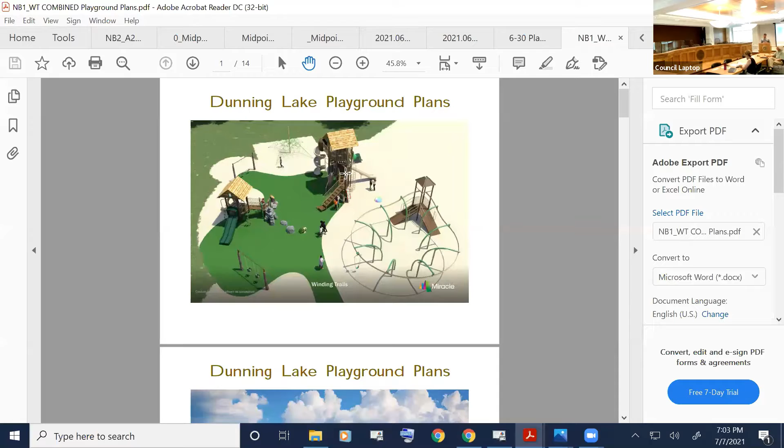What was presented to you a few weeks back is our plans to replace the Dunning Lake Playscape. It was built in 1990 and is showing its age. It is still useful, but we do have some issues with the ground cover and meeting current safety standards. About a year ago in October, we went to the national conference in Baltimore, viewed a number of vendors, narrowed it down to 4, had 4 presentations, and decided to go with a company called Miracle, with the installer, a local company out of West Hartford called Creative Recreation.

It's basically got 2 playscapes, which we have there now, a 2 to 5-year-old playscape on the left, the smaller one, and the larger 6 to 12. And then it's got a gravity track rail, that neat looking thing on the right, along with a couple of swings. And you'll see the artificial synthetic turf there. That is what is required for the higher elements. We had long discussions around the proper material. Because we have Dunning Lake Beach, the sand migrating into some of the other surfaces we considered negated their effectiveness in fall zones.

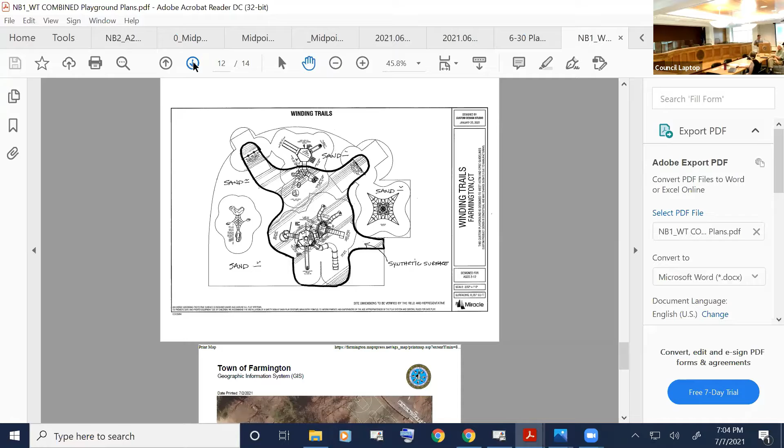So this actually worked out. I think you've got a cut sheet of it. It's actually a sand infill, and there will be some maintenance we'll do weekly in terms of mixing that stuff up. That's a picture Shannon brought up there of it. Brian's got some more specifics in terms of location and proximity to the water, and I'll let him discuss those things. Thank you, Scott.

Commissioners, my name's Brian Cunningham, professional engineer, state of Connecticut. As Scott mentioned, I'm chairman of the Area Facilities Committee as well as vice president of the board of directors. You read my mind. I've got this one and I've got an aerial. I'd like to speak from that one for now. Yes, certainly. Thank you. I hope my binder doesn't do anything to your keyboard. There.

At the bottom is a 20 scale 8.5 by 11 plan that I put together showing the layout configuration of the elements. The nearest element to the edge of the lake is 100 feet, measured perpendicular. We do have a small expansion, about 1,350 square feet to the northeast, the back side of the elements. What was driving that was the fall zone for the swing sets, one for the older kids on the southerly side, and the small babies and toddlers with their little baskets, which also has a fall zone that extends outward. So we wanted to cover that with the new surfacing we're proposing. And then to the north is the younger kid elements.

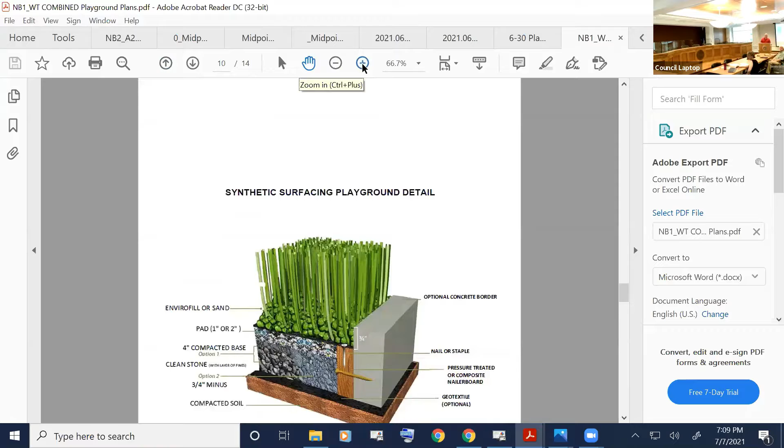So there's a pre-step to putting in the compact base, and that's an edge board, and it includes a nailer that's used later on to hold the geo, what do they call that? I wrote it down somewhere, but the grass looking material that gets nailed down to this nailer, and then there'll be a sand infill in that grass material. Between the grass layer and the compacted stone, there's a 1 to 2 inch layer of recycled material. It's an impact surface that's sealed off from the environment.

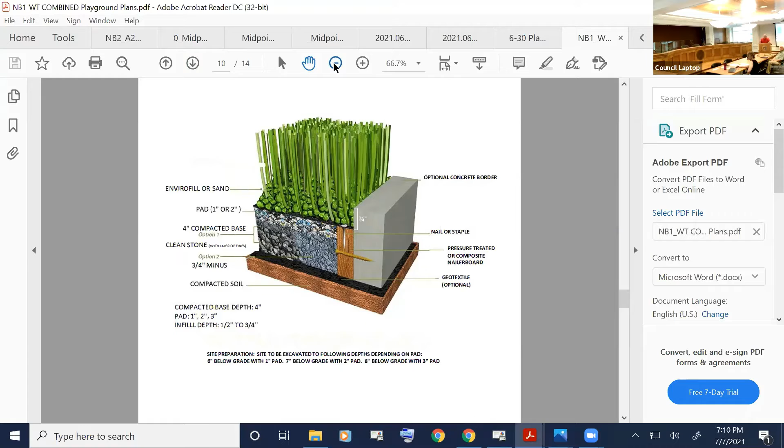The Playscape installer will fine grade that surface. They'll set foundations for the new elements and install all the components to the system. Plan to start upon getting approvals. We'd like to start after our acoustic festival in October. Get most of the site work done before winter, and that way we'd be able to get up and going anytime over the winter into the spring.

I think that's it, unless anybody has some questions. Either Scott or myself can address any questions that anybody has. Okay, perfect. Thank you. All right, start with Rich. I don't have any questions. Looks like a good project. Thank you. Dave?

Yeah, just one quick question. The schematic showed envirofill or sand. The envirofill looked like it was some sort of green globules. You're not going to use that. You're going to use sand. Okay. Just wanted to clarify that. Thank you. Okay, thank you. Robert? No questions, thank you. Mark? No questions for me. Ned?

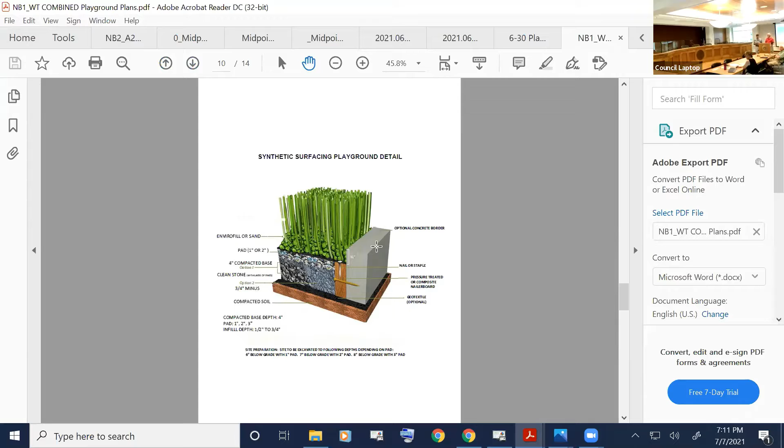Yeah, are they gonna use this optional concrete border? No, that will not be used. That'll be just bordered by the sand. Okay. And I'm just trying to figure out, so when I look at some of your digitally made photos of this thing, you got like a green area and a white area. Yeah, like that picture. There's a couple of them.

So is the white area just gonna be regular sand, and then this green area is the astro cushioned whatever? Yeah, exactly. So the green is the synthetic surfacing, and everything you see here white would be our regular beach sand, which is actually brown looking, but it would be regular beach sand that we get each year.

Yeah, and then Mike, sorry. Sorry, Scott, sorry about that. Yes, the green is a synthetic turf, and all the white in that graphic is actually our beach sand. So it would be browner in color, but it would be the sand that we've got there now. Okay.

I think that's all I had. Yeah, it looks like a good project. Yeah, that's it, Ned? Yeah, that's it. Okay, thanks. Just a quick question. It sounds like you're talking about starting to do some of the groundwork in October. Is that to allow people to still continue to use what's there over the summer, then gearing up more towards the fall and into maybe late fall to start getting this stuff in so you're ready to go by spring?

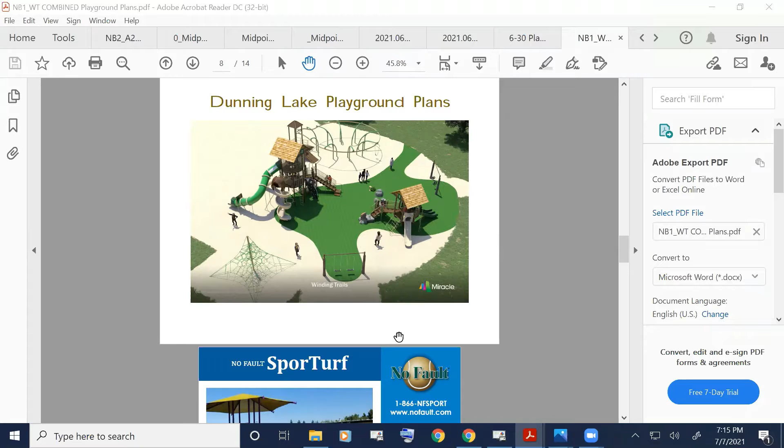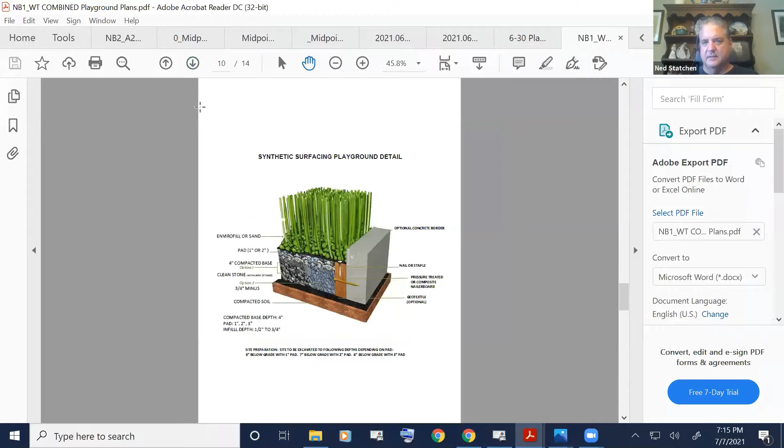Yeah, as long as we're clear that they are using sand as the infill on the AstroTurf and not whatever those green globules are, because I would be concerned if it was EnviroFill. But if we know we're using sand, then I think it's just replacing similar materials, replacing a similar facility with an update. So is that clear? Is that in the record somewhere that they're using sand and not EnviroFill? Yes. Okay, then yeah, I think it's a normal use. Okay.

I have a question when people are talking about a normal use. Robert, I think you said it's a non-significant activity, but it is regulated, so you're leaning towards an application. I'm just trying to make sure I understand. Yes, that's correct, Bob. I think this would require an application. I would view repair work more like a plunge pool from a stormwater system that requires maintenance. This is clearly replacing an existing structure, but there's a fair amount of activity occurring, albeit 100-foot separating distance. I still think it's an application.

Okay, and I agree with what you're saying because that's my take on it too. But I want to get a clarification from other folks because I'm not sure of the terminology folks were using. So, Rich, clarify where you're coming from on this. Yeah, I would agree with Robert. Okay, and David? I would too. Okay, Mark? I'll come back to Mark. We'll try Ned. Yeah, I would agree that we should have an application for this. Okay. Then Mark?

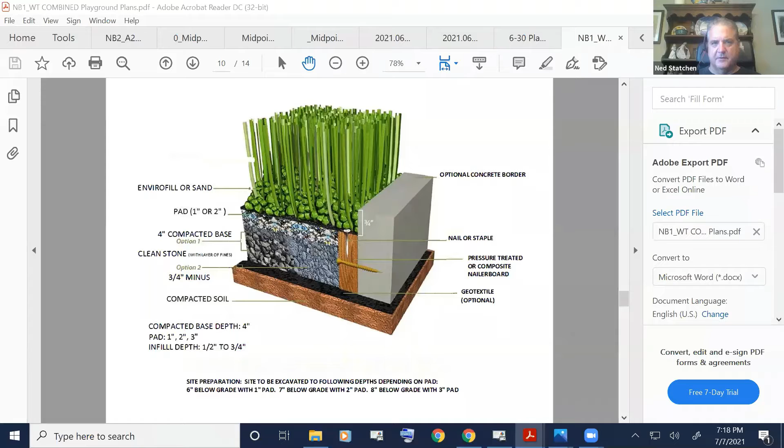So it sounds like we're leaning towards accepting the application. Excuse me, Mark wrote in chat: I agree application is necessary. Oh, okay. Thanks, Ned. I just saw it. Okay. So can I get a motion to accept the application? Dave will do that. Is there a second? I'll second it, Ned. Okay, I think everybody was pretty uniform on this. Those in favor signify by saying aye. Aye. Aye. Opposed, abstaining. But I also agree that it's a good project. So that'll take care of this for the evening.

Thank you. Do you want a site walk or do you want to determine significance at this point? No, I think Robert had said initially that this was not a significant activity, but it was regulated. Okay. Do we want to vote on that tonight or wait? Yeah, I'm happy to do that. Does somebody want to make a motion that this is not a significant activity? So moved by Robert. Is there a second? I'll second, Ned. Okay. Those in favor, please signify by saying aye. Aye. Aye. Opposed? Abstaining?

Okay. Alrighty, okay. Thank you very much. So we'll finish up in 2 weeks then. Okay. All right. Sure. Thank you very much.

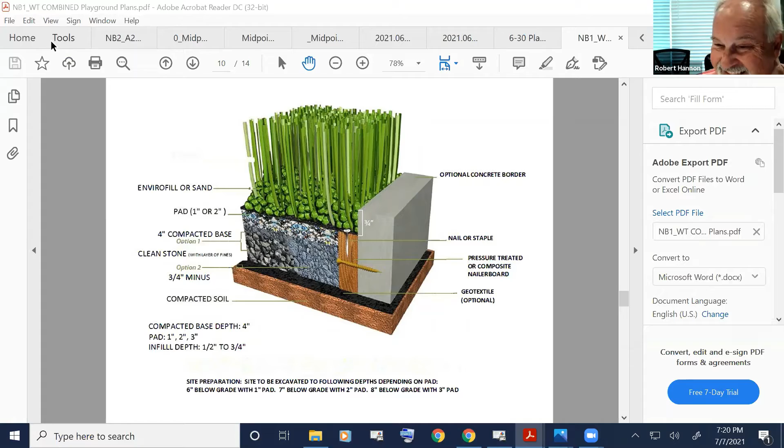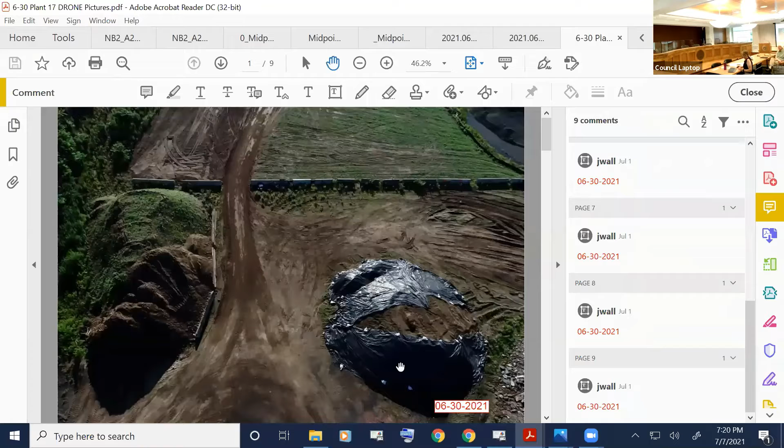And seeing as how I don't have a copy of the current agenda or the new one, what's next? So what's next? We are going to chat with Brian and Crystal Horan regarding 6 Carrington Lane and an expansion to their home. I'll bring that up here. So, and I believe we have Brian and Crystal on the phone.

Is that correct? Yes, that's correct. Good evening, everybody. Good evening. Good evening. Thank you for taking the time, and Shannon, thank you for helping expedite the process. It's been a hectic week for us, but we're excited to present, and I'm actually excited to be home. It's been about 19 years since I graduated, grew up in Farmington, and my wife, myself, and our 2-year-old daughter are back home, and we're really excited.

So what we have proposed today is, we're hoping to get approval to do roughly an 8x12 bump out addition on the southern side of our home. And as you can see on the map here, the rear setback is right in that 20-foot range. However, there is an existing deck that puts us probably somewhere in the 12.5 to 13-foot range of that boundary, inclusive of the wetlands that surround our property.

And what we're asking for is that the addition would basically be a 2-level addition. It would go out only as far as the current existing deck. And I think with regards to being aware of the environment and any of the steps that we would need to take, I know there's a couple of different ways to go about the actual construction. We currently do not have a basement at this property, so it would be either extending the crawl space and building out on a foundation, or entertaining the idea of building on top of the existing pillars that are there right now for the deck.

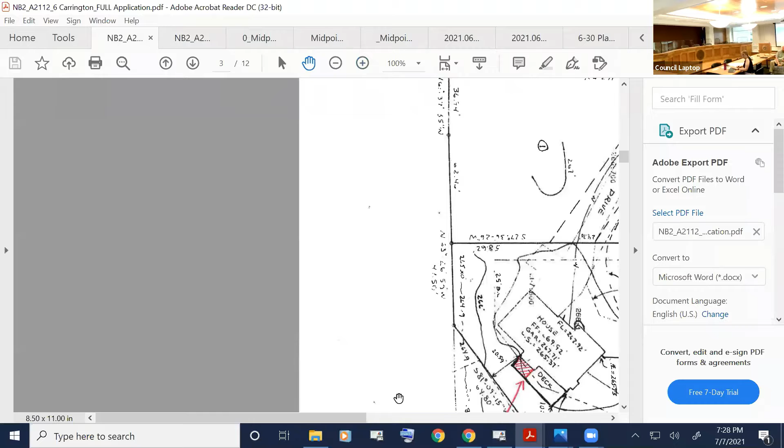So this is the setback line here that they need to follow. This is a side yard setback, and then this is the rear setback here. I'm going to flip back to the other map, but I thought this would be helpful because it shows the wetland, property line, and setback line fairly clearly. Yes, it's very helpful. When we come back here, those lines are still there. It's just, there's a lot more detail on it.

So here's the property line, the dark heavy line. This is the wetland area. You can see the arrows, and it's changed. It's a dashed dot line, so it's the two dash and a line. And you can see it here sneak out to the outside of the property line, as we had seen on the subdivision plan. And then this is the 20-foot side setback line here, and then the 25-foot rear setback. Is that helpful? It is.

It helps a lot. So again, I think the conclusion I'll reach is it's a use as of right for residential property. It's the conversion of lawn to a structure, and the separating distance between the structure and the wetland is not going to be any less than before this. So I'm comfortable with what's being proposed. Thanks.

Okay, thanks, Robert. Mark? Mark chats that he has no questions. Okay. Ned?

So you are going over the building line though. And so are they gonna have to go to planning and zoning for that, or a ZBA? So this was precipitated by an application that Horan's made to the Zoning Board of Appeals, and as luck would have it, I'm agent to ZBA as well. So when I was reviewing the legal notice, I realized that this was also going to need, at a minimum, a discussion with our Inland Wetland Commission to determine if it's permitted as of right.

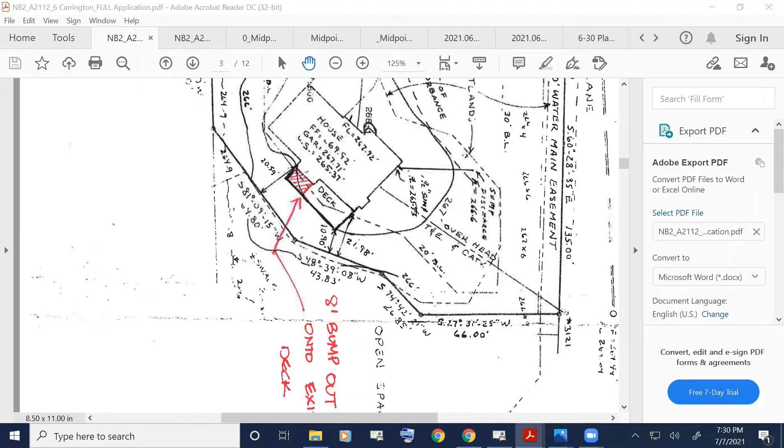Okay. All right. Well, it's not a big encroachment. They're still within what they have built as a deck right now, basically. On one of the sketches, it looked like they were gonna build a patio at grade level on the other side. You have a deck on this side and the other side. Yes, there is an existing patio. Okay, so that's existing? Yeah, correct, it's there. Okay. All right.

Do you see any wetland markers on the property? I'd have to walk the property again. I know that the land trust markers are very visible. Yeah. Okay, I'd have to go back and take a more in-depth look. I've never seen any wetland sign, but they might be there. There's a lot of vegetation back there. There are little signs on posts and they are easy to miss sometimes.

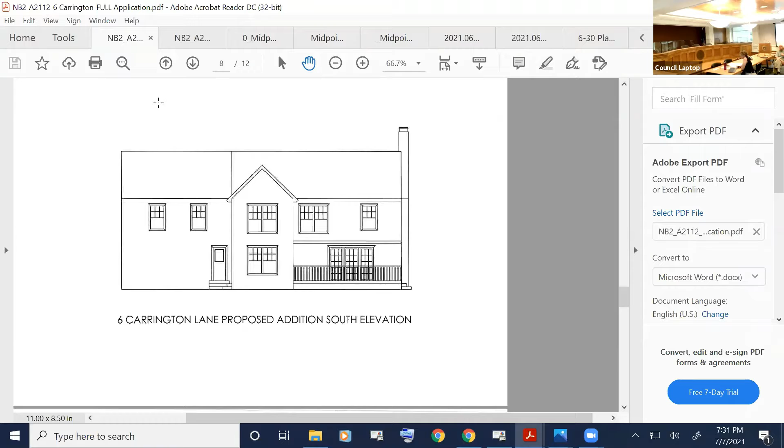I'm just wondering. I don't believe there's a conservation easement on this. Oh, there isn't? No, because the land outside their property is the land trust, and that's normally where we'd put the conservation easement. So if the land trust markers are there, that's really providing the benefit that the conservation easement markers would. All right, okay.

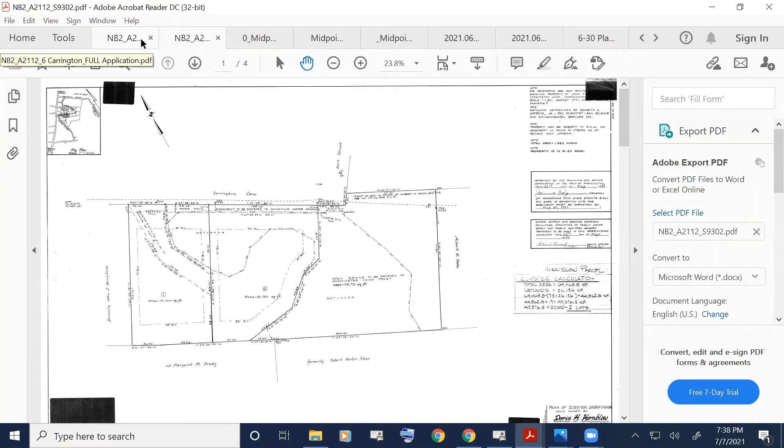Okay, so Shannon, we need to make a decision as to whether or not this is a use that's allowed under the regulations for residential use. Correct. Would somebody care to make a motion to that effect? This is Robert. I move that the project be approved as a use as of right for residential property. And Shannon, do you have the regulatory citation? Yes, section 4.A.4. Thank you. Is there a second? Dave will second. Okay, it sounded like everybody was pretty much on board, so I'll go right to vote. Those in favor, please signify by saying aye. Aye. Aye. Opposed? Abstaining?

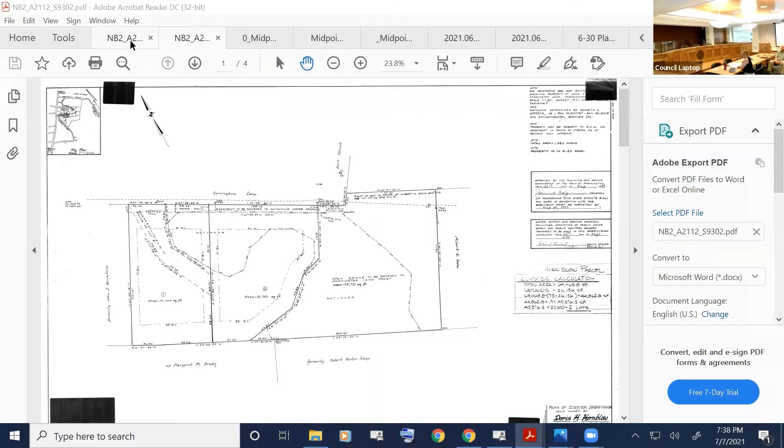Good luck at ZBA. Thank you very much for your consideration. Appreciate it. Thank you both for calling in this evening. Thank you, Shannon.

Mr. Chairman, this is Robert. Just make sure that if you go through ZBA and it's approved, your contractor works closely with the town staff, because you are in very close proximity to the wetlands. You want to make sure that your soil and erosion control is put up first and that they don't move any equipment into the wetlands, because that would be problematic. But if you work with Shannon, everything will go fine. Noted. Thank you. Will do. Thanks, Mr. Chairman. You're quite welcome. Good comment.

I'll defer to you, Shannon. Sorry, Bob. All right, we're going to go to JRF Management LLC and Coyote Real Estate Development LLC. I believe we have a number of people on the phone, so whoever wants to take the lead, please introduce yourself and we can get started. Good evening to members of the commission. My name is Robin Pearson. I am an attorney with the law firm of Alter and Pearson in Glastonbury, Connecticut. I am here this evening on behalf of the applicant, JRF Management LLC, which is the owner of the application site, and also Coyote Real Estate Development LLC, which has a portion of the site under contract for residential development.

There are several properties that comprise this development site of 24.85 acres, which is located between Farmington Avenue to the north of the site and the Farmington River to the south. It comprises four parcels: 1349 and 1371 Farmington Avenue, and lots 8218 and 8237. They are all part of the Midpoint mixed-use development proposal, which is a combination of new residential development and redevelopment and repurposing of the McCullen commercial side of the site, all to create this mixed-use concept, which is fairly unique under the new zoning that's in place.

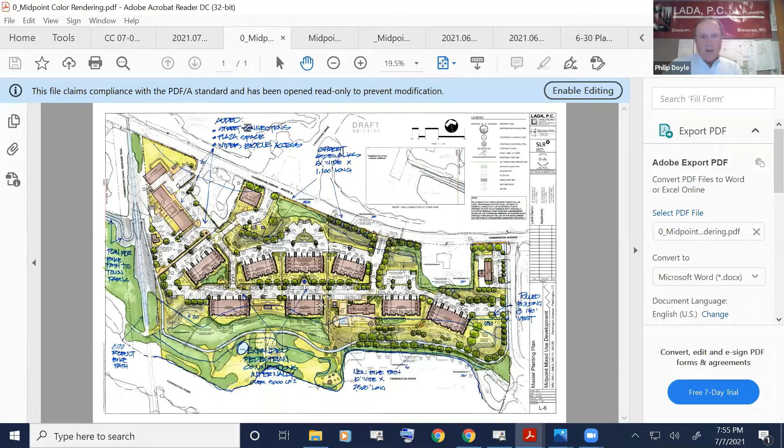And I think we have a reasonable plan, and perhaps Shannon, let's go to that color rendered plan. And you can see what's happened. We dragged building number 8 in about 140 feet on the eastern boundary, pulled that more into the core of the site. And down that main street, we've pulled the sewer line away from the river, and we'll be running the sewer line down the main street, actually shortening its length to some degree.

And we have the same amount of buildings, a pool and community center complex. So Shannon, if you could step this back a little bit so that we can see more of the entire site, that would be helpful. Just to give us a sense of where we are, there are the identified wetlands that Megan Raymond picked up. Those have been picked up by the surveyor, and they are shown in a blue line that runs right through there. You're right on top of it.

Right through there, it runs around a peninsula that was left in the excavation efforts on the property, and then runs along basically the base of an embankment. There is a 150-foot upland review area that's also in blue. It's that line there, Shannon is tracing it, and we have parts of 3 buildings. They've been identified in the data table. A section of building number 8, a small corner of building number 5, building number 6, and a corner of building number 5 in the upland review area. And we have a part of the pool and some sidewalks.

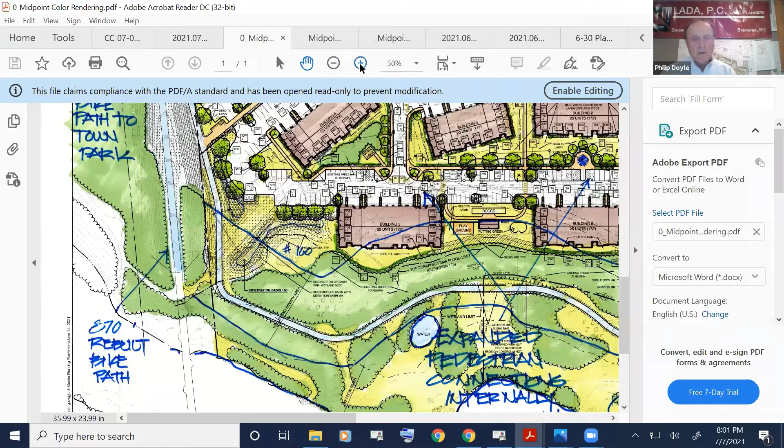Shannon, if you could point out the 175 elevation. The 175 is the FEMA flood line that runs through the property, and it's that black line right there that is between the identified poorly drained soils and the upland review area, right through there. That's important because we want to make sure that we have no disturbance within the floodplain, and that's the FEMA line. But we know that the town of Farmington in the zoning regulations has a flood zone, and even though the flood elevation line by FEMA is 175, all of the buildings have been set at 182, which would place them above the town of Farmington specific zoning regulation flood line.

So the pad itself, think about grading, the property is generally level, 20 acres or so, and in the area where the buildings are being developed, perhaps the lowest elevation is about 176 and the highest is about 182. So over 25 acres, we've got about 6 feet of topo, which is almost flat. And the buildings are situated all at 182. The water drains into either catch basins or is directed into lawn areas where it would receive treatment by running through lawns and then into infiltration basins.

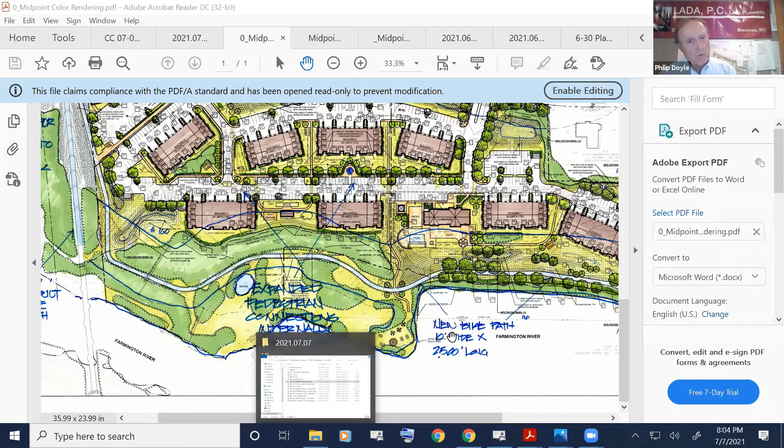Shannon, could you flip to those last couple of pages that are the invasive species plans? Yes, I will. I wanted to touch on that for a second, because the site has a history of being disturbed for soils excavation. Yeah, they're the colored ones at the back. Yep, it's easier to. Oh, there's the dock. You want to go back to that?

Here we go. Yeah, that's the type of dock that we'd be proposing. It would be anchored by 4 removable posts that would come out in the fall, go in the spring, and they float. But that would allow us to have access for the residents to the river without disturbing the river bank. We could direct all of the traffic onto the dock and not have to worry about people dragging their kayak down to the beach. And we think this would be a much more sanitary way of handling that situation.

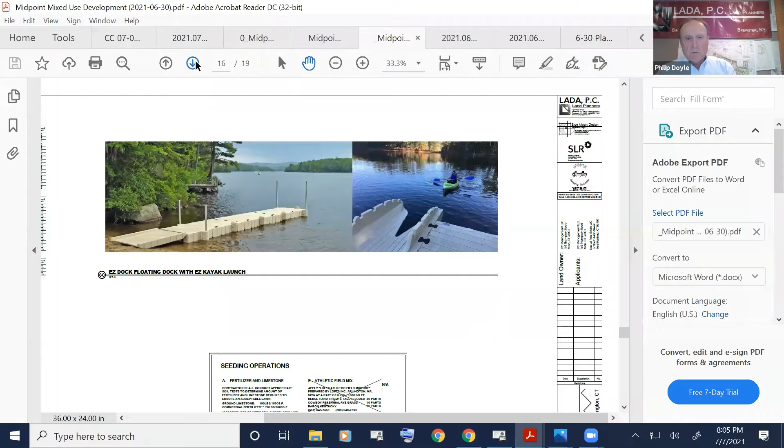Shannon, can we just go to those last couple of the invasive species plan? Yes, and maybe if you backed that off a little bit so we could see more. I at one point had given the town staff, and perhaps the members of the Wetland Commission had seen it, 4 pages or so of photographs taken all around the property of the extent of invasive species coverage, and it's really remarkable. The various colors on this plan are representative of where different invasive species exist.

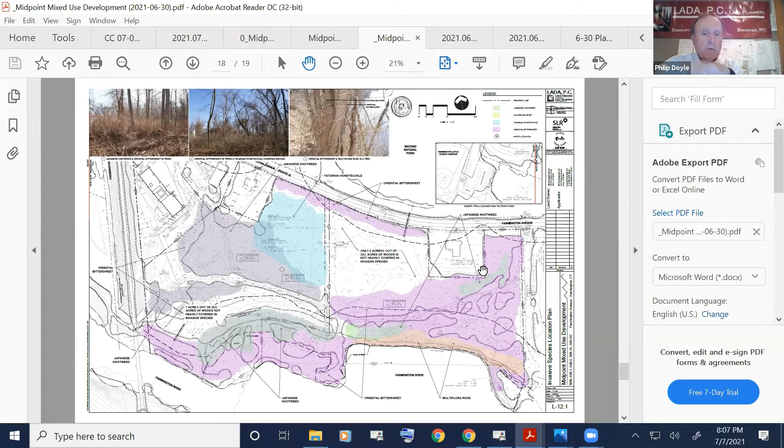And I know when Megan has been out on the property, she's found even more invasive species by type than I had identified. But we have large areas of Japanese knotweed, large areas of Oriental bittersweet. We've got multiflora rose. We have all types of invasives that have wanted to colonize the disturbed areas of the site. And let's flip to the next slide there, Shannon.

When we get through with this development, what is going to have happened is that the invasives in many of these areas will be removed by some of the site construction. Along the river's edge, however, we have Oriental bittersweet that has colonized much of the existing tree mass along the entire river's edge. We're going to have to cut that out.

And then we have the large areas, particularly on the west, of the Japanese knotweed, right in this area. The areas that are blue in that area are Japanese knotweed, and that's going to require some relatively continual maintenance. We've seen people be successful with the Japanese knotweed with cutting over a period of time, but perhaps even the use of some chemical retardants to kill the knotweed. It is very, very difficult.

At this point, I am not proposing the disturbance of the embankment in the area immediately on the screen here, that is sort of the eastern half of the site that runs from the bike trail down to the river. That area is colonized in part by briars, some of the wild rose, and perhaps even some of the bittersweet. Now, the bittersweet is killing the trees in this area, so we've got to cut that out.

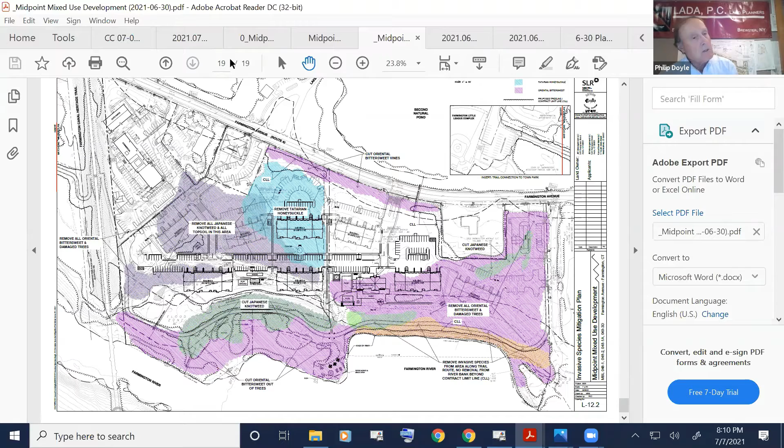Shannon, could we step back and go to the L, perhaps 4 and 4.1? Way back. That existing condition plan might be helpful, the one you had there a second ago. It might be the L2. Yes, go to that plan you just had up. Yes, thank you. I don't know if you can see this clearly, but when the plans are printed, they're much easier to read, but there is a light tone. It's supposed to be a tan tone shown on these plans.

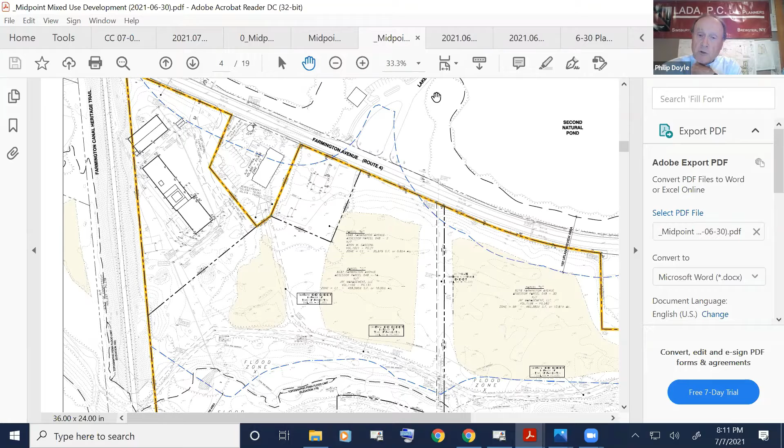And those areas, I had pointed out to you a few minutes ago, the line of the poorly drained soils that Megan had identified along the river. But when we talk about alluvial soils, it is these tan areas that sit in between the sewer lines on the property that are the alluvial soils that Megan has identified. The white areas in between are not. But these areas are, and when you total those up, there's about 5.2 acres of alluvial soils on the property. We have about 2.15 or so acres of poorly drained soils that are down by the river.

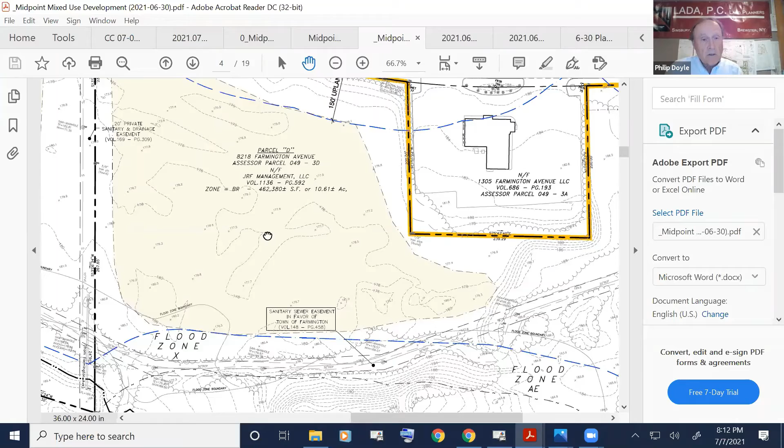Now, Shannon, if we could go to the, I think it's the L4.1. One of the next 2 or 3 slides, smaller scale master plan sheet. It might be the next one. Try the next one. Yes. As we were in discussions with the town staff during a review, it was requested that we consider showing the bicycle path connection into the town park.

We have been aware, I'm sure everyone is aware, there is a municipal park immediately to the west of the railroad embankment that extends another 2,000 feet or so up the Farmington River towards the west. And the plan of conservation and development shows a bike path connection going east onto the property that we're proposing to develop, and also west into the town park. And we agreed that we would show the design for the bike path connection into the existing parking lot area for the town park.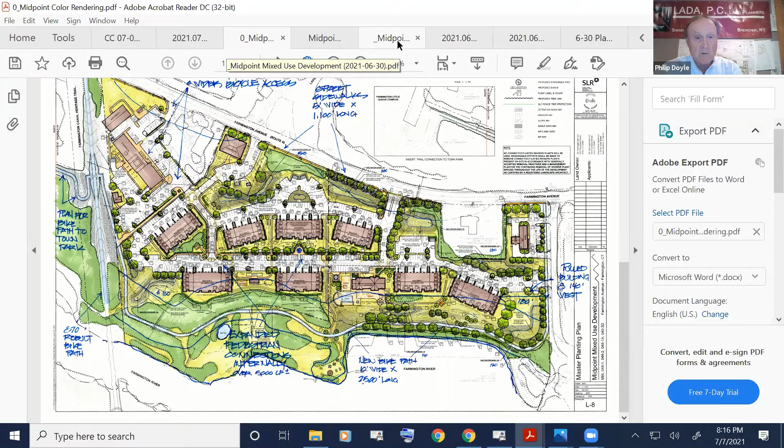And I think with that, I'd like to step back and let Tom get into the detail of how he's handling the erosion and sediment control and the storm drainage. And then we'd like to go to Megan to get into the details of the soils and the impact analysis. Thank you, Phil. For the record, this is Tom Daly with SLR. Shannon, could I trouble you to put up the, I believe it's an L2 sheet, which is the existing conditions? Great. So good evening, Commission.

So we have taken a very close look at this site, and I think if the Commission takes a site visit, you'll see that, as Phil indicated, it's relatively flat. There's not a lot of undulation on the site. There is some steep topography adjacent to the river, but in the area where we're developing, it's very flat. And if you make a site visit, you'll kind of scratch your head and say, well, where does the water from this site actually discharge? And it's our belief and our investigation that actually water doesn't discharge from this site due to the excellent underlying soils and the underlying topography. It's our professional opinion that virtually all the water does just simply infiltrate into the site, except for maybe under some extreme conditions.

Today, as Phil indicated, in the far upper left corner of this map, there's a developed portion of the site, the McAllen building. The McAllen building has a single point discharge that is a 24-inch pipe. That discharge is about 130 feet. There it is. Yeah, thank you, Shannon. There's a single discharge point that goes to kind of a level spreader slash riprap basin. The ultimate discharge of that point is about 130 feet from the Farmington River and about 125 feet from the wetland edge. So still naturally providing a pretty nice infiltration buffer from that pipe over.

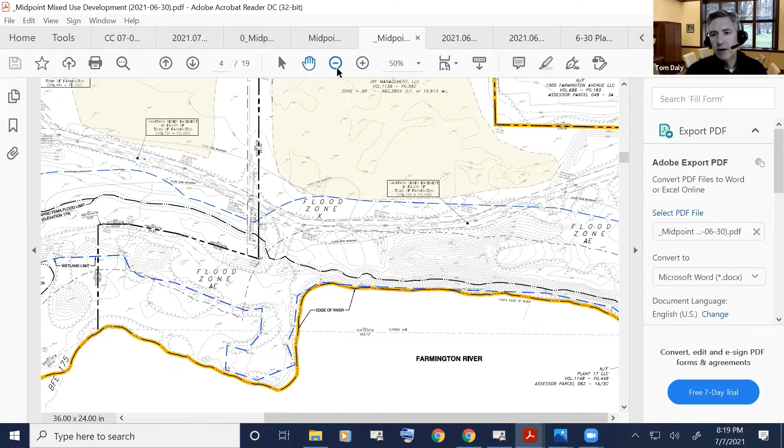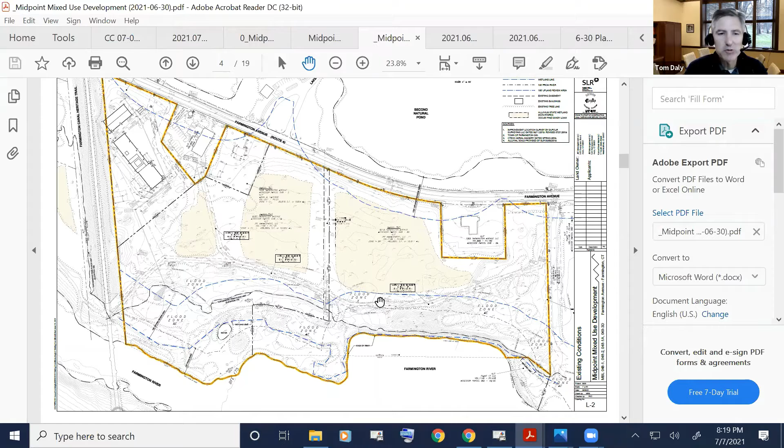As part of our investigation, we did 32 test pits across the site and found no groundwater, found no ledge, and found that basically the entire site was good sand and gravel. So once again, it really points to the fact that we really have a site that's very productive in terms of infiltration. As Phil indicated, the one major utility going through the site is a 30-inch diameter sewer main. It goes from the left where the trail is and goes right through the middle of the site. Yeah, it's interesting. It's not an engineer's dream for alignment, but that's how it got put in, and that is through the site. Otherwise, basically, those are the items on the site. Shannon, if we can go to, I believe it's the UT sheet.

So as Shannon's getting that sheet, obviously we worked very hard to mimic the existing drainage patterns, and that drainage pattern is basically promote infiltration. And as we went through the master plan approvals through zoning, as Phil indicated, this is in the aquifer protection area. Just off plan and to the right is the wellhead for the water company. We received comments from the water company during master plan approval, and we've also done other projects in the area and knew what they were looking for.

And so we worked hard to mimic the existing conditions, where we wanted to promote infiltration to the highest extent possible. And we really did achieve that in two different ways, and these mimic the recommendations from the water company. First of all, we took the buildings to underground chambers. Building water is essentially clean, it's just coming off the roof. And I believe we have 11 of those systems located throughout the site.

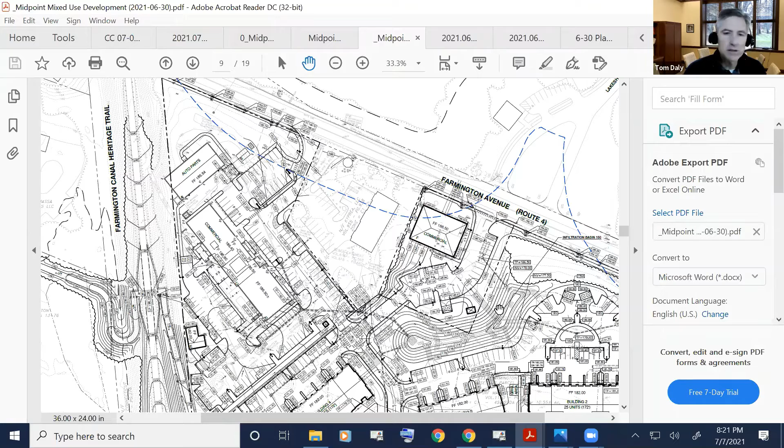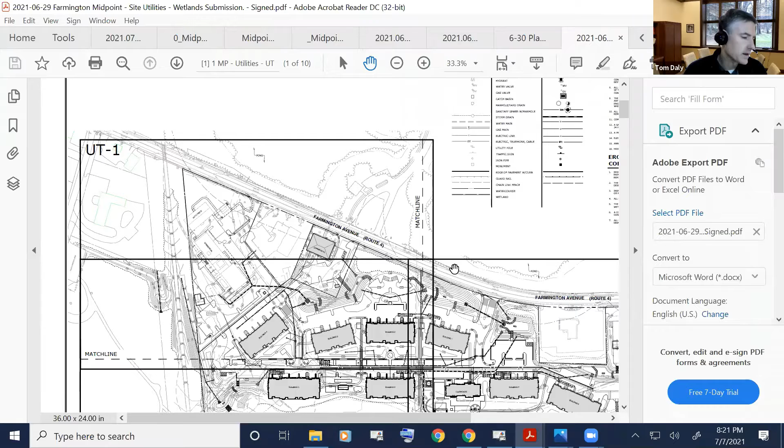The other major drainage system on the site is 6 infiltration basins, scattered throughout the site. They include sediment forebays prior to the discharge, and prior to each sediment basin we have a hydrodynamic separator to provide additional water quality before it gets to the basin. In addition to the sediment forebays, these basins also have infiltration trenches to further promote infiltration. We were able to use those on a project just a couple parcels over, and they worked very well.

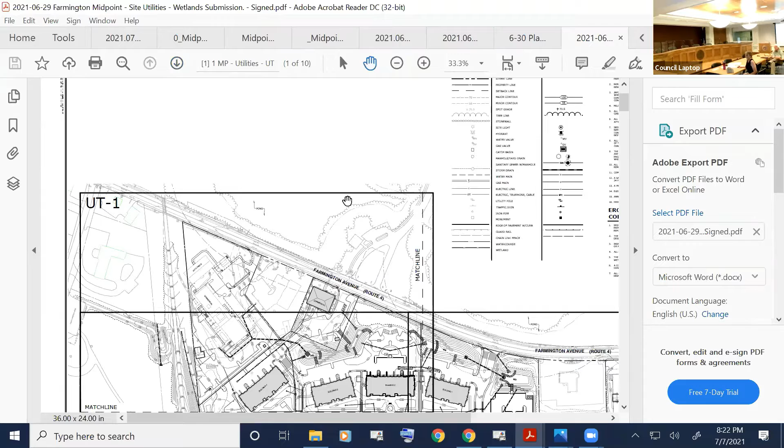So thank you, Shannon, as you're bringing that up. I forgot they were a separate file. Oh, sorry about that. So maybe the previous sheet, Shannon, it's the overall utility plan. Certainly. There you go.

So once again, we're using this combination. Many of the pavement areas are actually just sheet flowing. They have a leak off that goes into a gravel trench and down into the basin. So we're using low impact development. There are areas that we will have to pipe, but in many areas we're just sheet flowing off into these basins. I think we've really covered the site equally. They're not concentrated in one area, they're spread out throughout.

And we also did calculations showing each basin has enough storage even for the 100-year storm. And that's taking credit for only 50% of the infiltration rates as recommended by the DEP. We basically cut them in half to have a factor of safety of 2. We really have 3 drainage structures that are adjacent to the area closer to the river. Shannon, if you zoom in by the McAllen building, down to that discharge in the lower left-hand corner.

There you go. So in the same location where the old McAllen discharge was, we've created an infiltration basin. This basin actually has no formal discharge. It has an emergency overflow, but we are going to abandon the McAllen discharge pipe that we talked about, and we'll be discharging into this basin. This basin will also take drainage associated with the bike trail on the left. And as I said, no point discharge in that location. So Shannon, if you can scroll to the middle of the site.

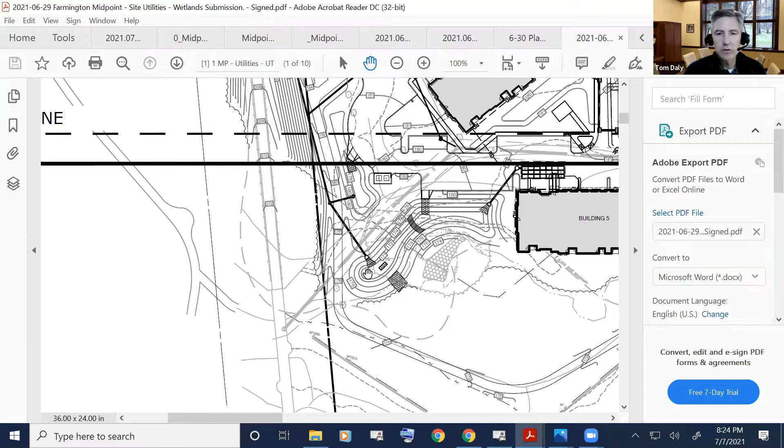So this is really the only pipe discharge we have going towards the river, but we have located it 120 feet, directly adjacent to the 24-inch pipe that's coming from the pond. And this is really just a high level overflow. All the area to the right of this discharge is very steep slope, and we did not want to intercept or mess with that on the right-hand side. So we had to bring a high level overflow around these 2 buildings and have a discharge.

But even there, we've created a biodepression at the end of the discharge. So essentially we don't expect any water to really make it to the river except under extreme conditions. But as I said, we tried to pick the same location where the other 24-inch pipe is and not have a new discharge point.

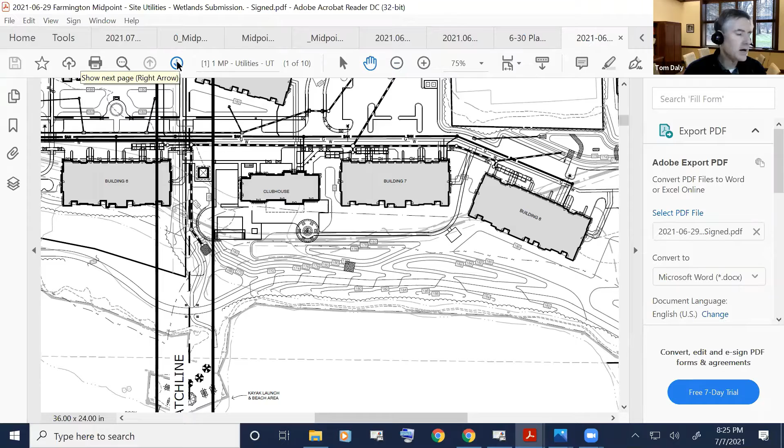So that discharge location is approximately 120 feet from the wetlands and the river's edge. In terms of erosion control, we have put together an erosion control plan as part of this application. The site is, as I said, relatively flat, good sand and gravels, so we should not get a lot of discharge, but we clearly have a wetland resource, the Farmington River, which is very important to protect.

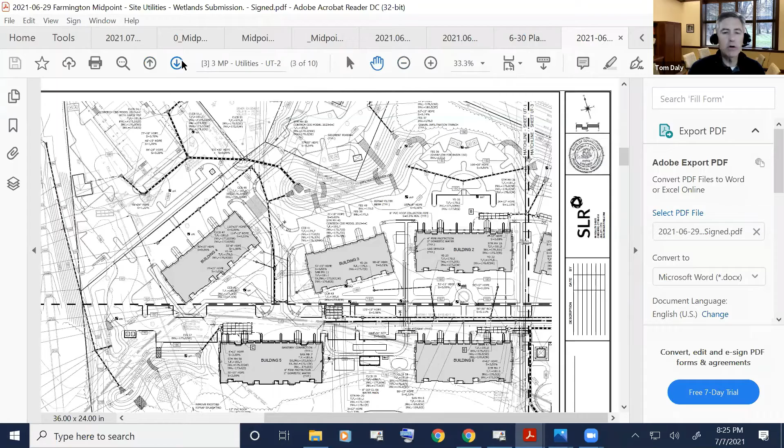And so we have perimeter controls along the trail, but upgradient of that, we have a diversion berm and a sediment trap system that will basically capture all construction runoff before it even gets to the trail. All those diversion berms will send this water into these sediment traps and hold that on site.

I would point out to this commission that we are not using any of the permanent infiltration basins as sediment traps. We were able to locate these sediment traps as an independent thing, because we didn't want to send construction runoff there, which ultimately could have some negative impacts on the infiltration of those as we move forward.

This site has very few steep slopes. The only steep slope that we really had to focus on is, as Phil indicated, we're reconstructing the entire trail system on the left-hand side of the site. We're ramping down steeply from the trail system. So that was one area that had some steep slopes, and we are going to protect that with an erosion control blanket and some check dams throughout there, because that's something we do have to focus on.

With that, that concludes my presentation, and I'd like to turn it over to Megan Raymond to present on the wetlands. Thank you. Great. Thanks a lot, Tom.

My name's Megan Raymond. I'm a professional wetland scientist and registered soil scientist, principal scientist here at SLR and Wetlands and Waterways lead. I'm also a certified floodplain manager. I became involved with the site in January of 2019, and it began by flagging wetlands on the property. As you've heard, we have about 1,800 linear feet of frontage on the Farmington River.

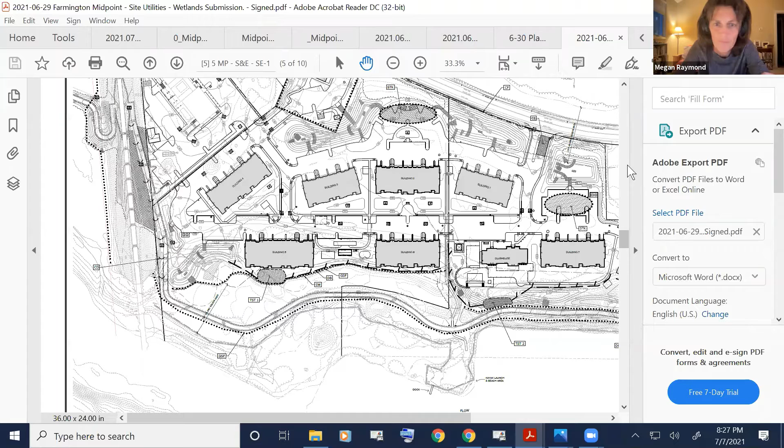Shannon, I'm just trying to figure out what the best figure for me is right now. I don't know. Sure, we could use this. I apologize for burdening you, but I don't suppose you have our existing conditions ecological communities map, perhaps. Either way, the EX plan is fine. The one you just had at the rendering is perfectly fine. We have some figures in the back of that report. So you're referring to your report, Megan? Yeah, sorry, but I can just use the EX plan that Tom began with. That's fine for me too. Okay. That's easy enough, and we can get into the other things later. So just the existing conditions. Yeah, perfect. I do have your report if you want it. Okay, maybe we'll get into that after I give a little overview.

And thanks for having us this evening, and entertaining us virtually as well as your in-person staff. So the site's 24.85 acres. It's oriented east-west here, with the Farmington River to the south, about 1,800 linear feet of frontage on the river. As you've heard, the site has undergone quite a bit of disturbance in the 20th century. We included some aerial photos from 1951 in the report, as well as I think 1990.

It's interesting looking at the modifications along the river over that time, where in '51 it showed a pretty clear little oxbow channel on the southern end of the site, and that was excavated for sand and gravel, and it's resulted in an appearance of the river on the site of almost an embayment or a small pond. It doesn't look like a riverine environment. It's quite still water. The average width of the river in here is about 600 to 650 feet, where we have an average channel width up gradient of about 200. So we're looking at a channel about 3 times as wide.

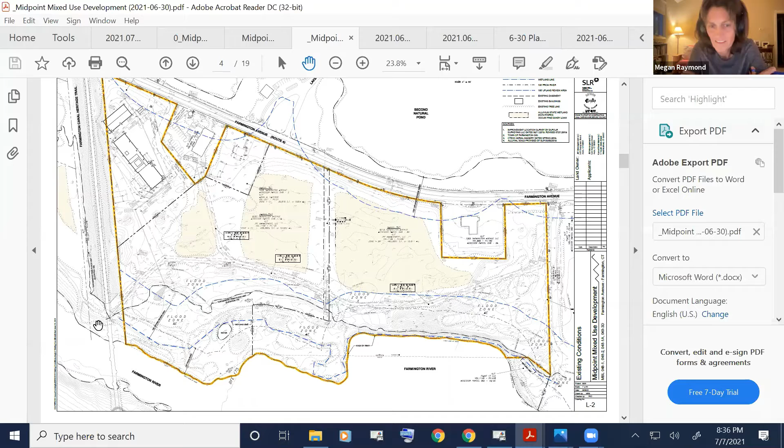One of the things that I'd like to point out, and actually it was an important mandate from your Planning and Zoning Commission, relates to no direct wetland discharges or no new discharges of stormwater. We have these great soils that allow for infiltration, and we've been able to design a site plan that has really dispersed stormwater management systems that allow for direct infiltration, or infiltration after water quality measures, very close to the points of interception of stormwater. That's lending to a dispersed and fragmented stormwater management plan that's going to only enhance and maintain those interests of the Farmington River.

I'm just looking at my notes, making sure that I've gotten everything. Again, with housekeeping, the wetland that exists along the Farmington is about 2.5 acres in size, about 10% of the site. The work within the upland review is relatively confined, with a majority of the activities related to the trail, which obviously is enhancing that wetland value with the visual access. We tried to minimize the infrastructure within the upland review to the rivers to the greatest extent practicable. And in total, we're looking at a plan that maintains the functionality of the wetland.

And if we want to get into the alluvial soils and relic alluvial discussion, I'd just like to point out that that analysis and that housekeeping as it relates to the alluvial designation is truly just that. It's almost arithmetic. These interpretations did not change the site design, did not modify the site plan. It's a factor of arithmetic and record keeping. And from our perspective, there are no regulatory implications of the relic alluvial on the site.

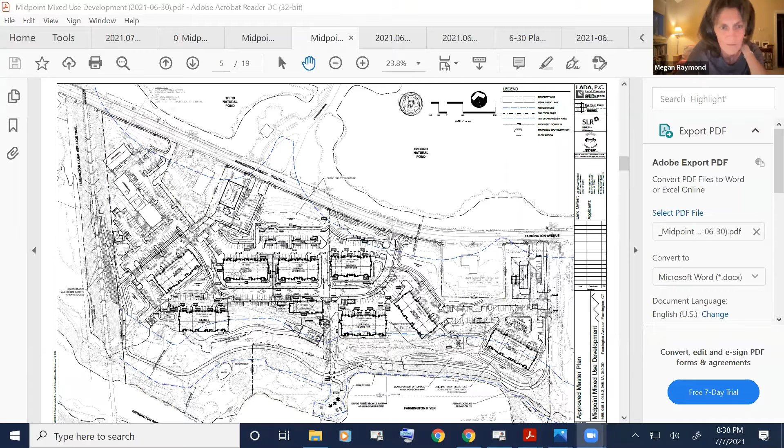Let me close by looking at the proposed conditions briefly with you, to make sure that we've got all the areas identified. I think you can look at the utility plan. That's perfect. We can see from this plan the clustering, the concentration of the building and infrastructure along Farmington Avenue, and then an opening and a green space with the trail bisecting that along the river. So we've tried to concentrate our uses with the intensity of use up by the road, where it feathers into the existing development, and then allow a nice green space and open space area to the south of the site. That's a perfect illustration. Thanks a lot for that, Shannon.

And just to summarize with the alluvial specifically, when we move to the west and you're getting onto your town park, that is a 1,300 square foot area of impact where we have some fill slope along the toe of the canal embankment. But as we're getting into your ball field property, there is 1,300 square feet of direct wetland impact there, and that is active alluvial. That area is within the floodplain. We do have active alluvial soils in that location, so that would be a direct wetland impact in that one spot of about 1,300 square feet.

I'd like to, at this point, close for now. I'm happy to answer questions, but I'd like to turn it to Robin to summarize our team's presentation this evening. Thanks so much, and I appreciate your time tonight.

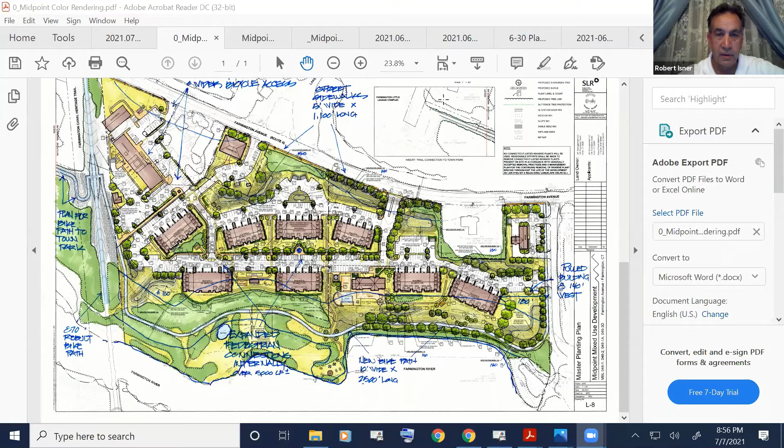I'll just reiterate that I think it would be useful to have Megan and Shannon share notes on discussions with DEEP regarding the relic alluvial soils, because it does have a substantive effect on our regulatory authority. Overall, I think the plan represents a lot of care in development, and it strikes that balance, recognizing where this agency has regulatory jurisdiction. The placement of the buildings really at the fringe of the 150-foot regulated area is appreciated. The presentation did identify there still is a fair amount of activity within the regulated area for this commission. So I think the overall activity proposed by the development will likely be significant.

The inclusion of the bike path, I think, is good. I'd be interested to know what the design of the bike path is going to be. Is it going to be traditional construction, or is there going to be any environmentally friendly materials used for the bike path itself? With regard to the placement of the dock, I think it is a good inclusion. As the presentation covered, it will help minimize the impact to the riverbank for people ad hoc putting in and taking out their watercraft. And that is going to conclude my comments. So no questions, they were all just comments.

Thanks, Robert. Mark? Mark had sent a message since he can hear us fine, but he's having difficulty with his audio. He says no questions at this time due to his lack of communication. He's been able to hear everything. He's just, for whatever reason, his audio back to us is challenging this evening. All right, thanks. Ned?

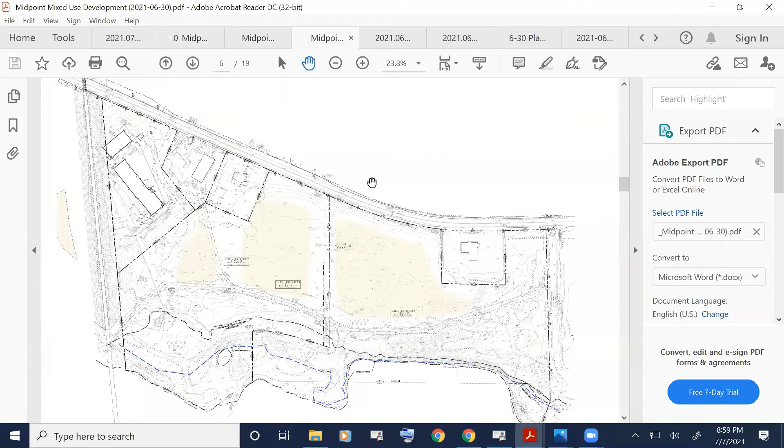So, oh, is that 4.1? Let me see. Yeah, okay. So I see that on the other side, on the development side, you've got your sidewalk coming down, and then you want to merge with a sidewalk that's an offshoot of it at basically 183.43.

I was just wondering if that was really important, because I'm thinking maybe you don't need to lower this so much, because if you just had one ramp that came off on the development side to put it on a wall, carried it down a little farther. And then why can't you just have it go to that first turn and then have an area, because I fish there all the time, and the abutment and the wing walls, if you just had an offshoot there and tied it into, there's an existing dirt road, instead of building this big U-shaped thing.

I mean, these things, if you gave yourself more room, a longer ramp, maybe you wouldn't have to cut down the grade of the bikeway as much, giving yourself more room to come down. I don't know. I'm just wondering if anybody investigated that, because there's already a path there that cuts in front of the abutment, and then it ties into a dirt road. So it seems like that would be a lot simpler if we could just make this a longer ramp on this side and then have the offshoot to the ballparks at the abutment to the railroad bridge.

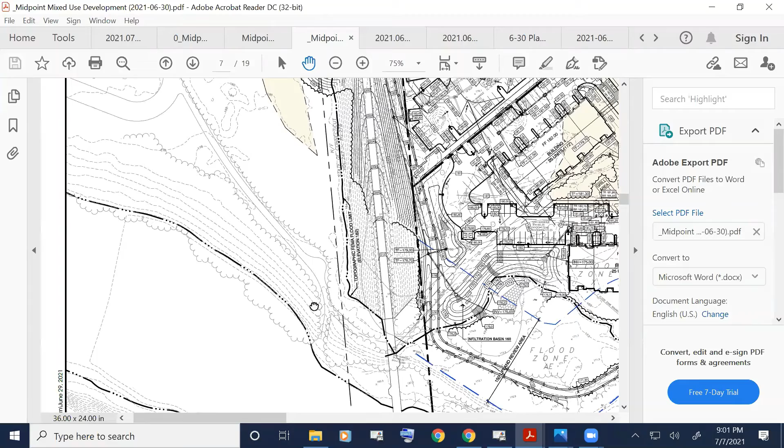And then you would lose that connection at 183.43, but that would be a retaining wall with the ramp on top of it, and then you'd come down to the rest of your grade here and tie into your development, I don't know, somewhere else. But it'd be nice to not have to lower this as much, and it would be nice not to have this big U thing, and then we wouldn't have to cut through the alluvial soils that are highlighted in yellow, and it just seems like a simpler plan. I'm just wondering if anybody considered that. Phil?

Yeah, this is Phil. I'm not exactly sure how to answer, because I'm trying to wrap my head around the question. Shannon, could you just make this a little bit smaller so that we can see the whole area in context? Yeah, somewhere like, let's just stop there. Make it a little bit bigger. You were perfect a second ago.

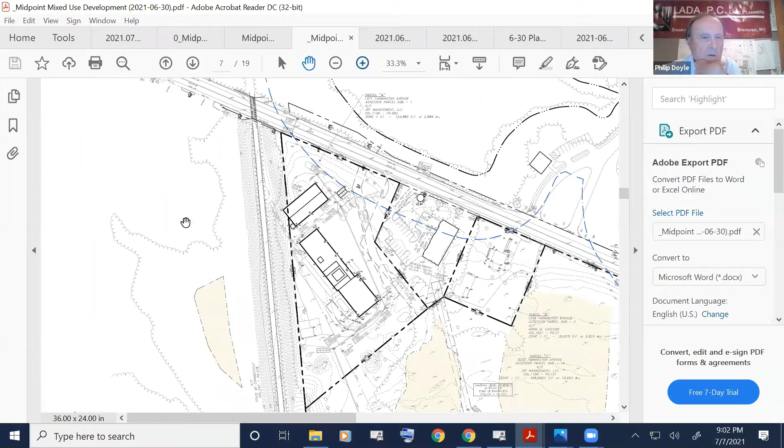I guess part of the answer is, as this project evolved, going back now 4 years, we've been working on it for a long time. The goal had been to develop the bike path connection primarily to run from the trail towards the village of Farmington to the east. And the focus in the town master plan was for a subsidiary connection to the ballpark. That was a secondary consideration. The primary focus was to take people from this north-south trending trail running to the east. So as we were speaking with the town planners at that point, everyone's focus was on the connection on the east side.

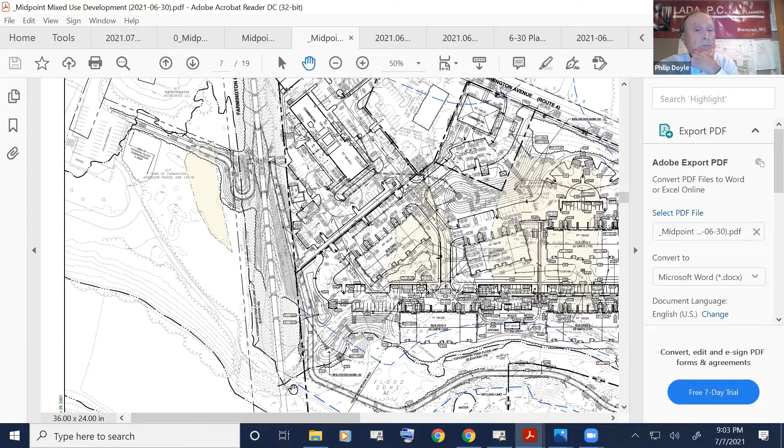Now, I started out my presentation earlier talking about the zoning, because many times zoning has impact on the design, and then that has a subsequent impact on inland wetlands. Part of the direction of the zoning move was to allow for the easier rehabilitation of the McCallum building, providing more people, more activity on that property. And the idea was to extend the bicycle path connection into the McCallum building, so people riding along the trail could come down a ramp and go directly into McCallum. Hopefully there might be some restaurants or other activities there that would make that building more occupied than it has been for almost 100 years.

So there were a number of decisions that pushed us towards having the connection on the eastern side as opposed to the western side. And it wasn't until relatively recently, when the town staff asked if we could show on the plans this secondary connection into the town ball field, that we did so. And you had mentioned the U-shaped form. Just so people understand why that design evolved, when people come down on the bike path and we lower this area down, that diamond shape the cursor is running around will be widening the trail and painting that area out, because that will become an intersection.

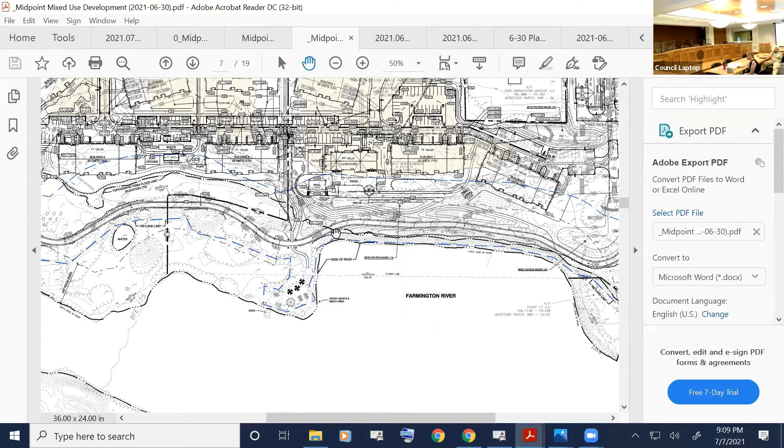When you get to this portion of the plan, the trail actually is above the floodplain limit. So the floodplain line comes down here, it follows the 175 contour level, and this trail actually is above the floodplain. So this portion of the trail is below the floodplain elevation. I don't know what the elevation is, I'd have to zoom in back and forth on this plan. Okay, yeah, I see. But certainly the velocity experienced here is the concern. Can it happen over here?

Sure. I'm not saying that we can't have an issue where the flood is so serious that we're now having to maintain and fix portions of this trail. I guess the point was that coming around this abutment was going to increase the opportunity and perhaps frequency of repairs to the trail that were going to be needed. And we're trying to minimize that, given that the town of Farmington is going to be responsible for the long-term maintenance of this trail. Okay, yeah, I see. So when you are at flood level, the abutment and wing walls become a constriction and speed up the velocity of the water. Okay, all right.

So on the new buildings, are they all residential units, or are they going to be mixed use? The new buildings are all going to be residential. Shannon could point out where there's a community clubhouse. That is a community clubhouse. Any of the buildings that are fronting on the river that would be within the upland review area, those are all residential. The McCallum buildings will stay commercial, though there will be apartments in the taller building, the masonry building.

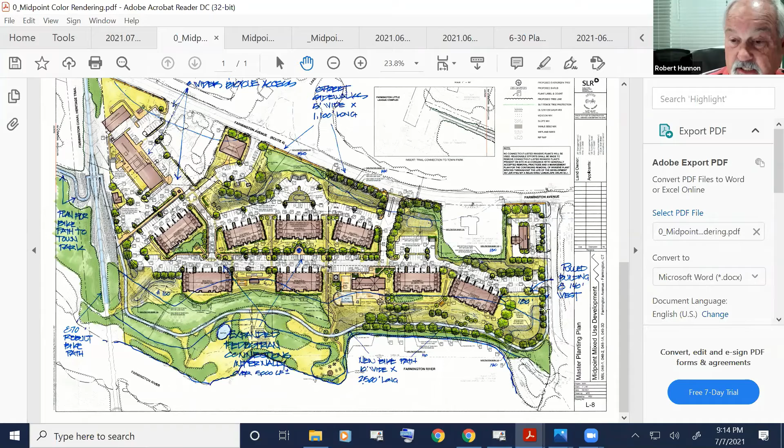Okay, thanks, Ned. I do have some questions, and I'm not going to get into the layout or anything along those lines. I'm sticking with the wetlands. This relic alluvial soils that you're referring to, Megan, is there anything in the Connecticut General Statutes stating anything about this? There's not. Okay, no, that's the answer. Is there anything in the Farmington wetland regulations allowing for this type of interpretation? Nope, that pretty much mirrors the CGS, the 22a. Is there any case law that backs up your interpretation? We were actually discussing that today, and we do not have a case law for you. Okay, so basically, alluvial soils are alluvial soils. It may not be directly connected to the river anymore, but based on the statutory and regulatory definition, that's still an alluvial soil.

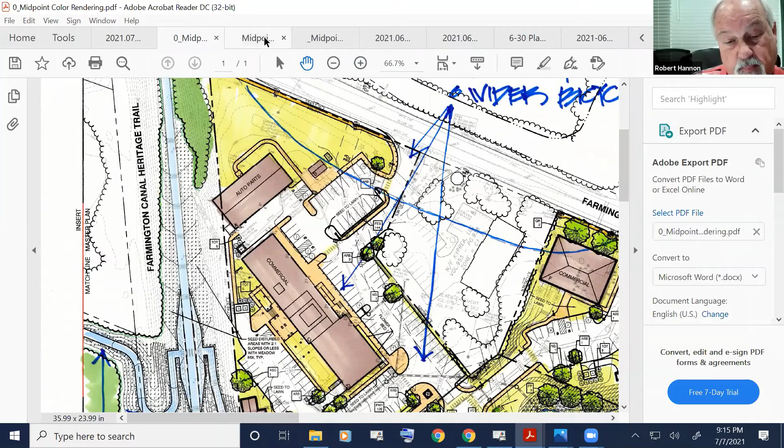So that's one thing. And Shannon, can you go into the map, maybe a little more detail? So enlarge it some. I want to be able to see where the wetland delineated line is and where the floodplain line is. Do you want it on this map? If it's on this map, that's fine. I'm just trying to compare where the wetland delineation is and where the 100-year flood elevation is. That's probably best on one of these maps, Shannon, because we have a lot of good mapping in our impact assessment, but I'm not sure the flood zone is on. Yeah, this is a good one. Okay, so if you can blow that up a little bit, please.

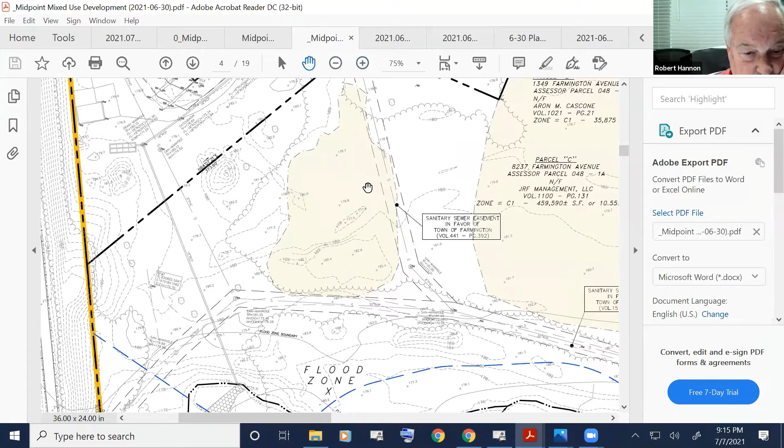We can walk through it. Okay, so this dark line, that's the floodplain line. Correct. So my understanding of wetlands is poorly drained, very poorly drained alluvial and floodplain soils. Right. So where you have the 100-year flood elevation, is that not floodplain soil? It is not. That is udorthent there. There's a lot of fill material throughout the site, a lot of HTM, human transported material. That is not floodplain soil in that location. Okay, I'm having a hard time with that one.

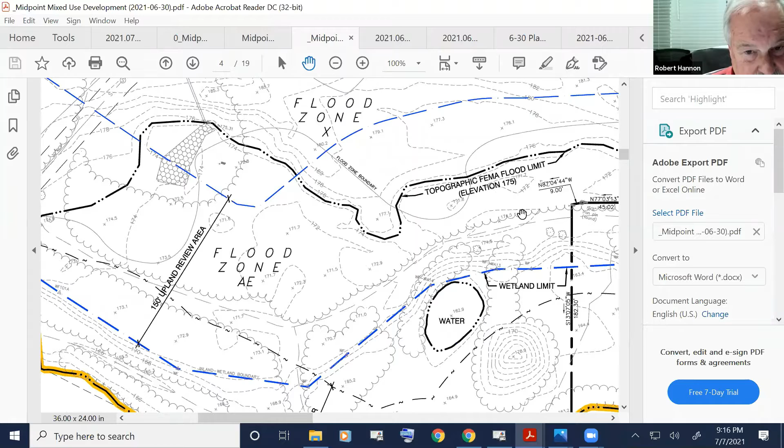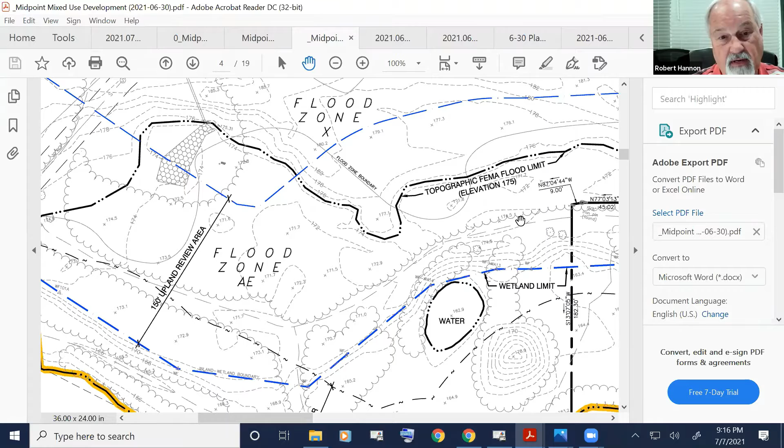Because where I'm going with this is, I agree with Robert in the sense that I don't have so much an issue with the project the way that it's laid out. I think there was a lot of thought that went into it. However, based on what you're saying, if I was opposed to this project, you gave me 2 ways in to appeal any approval on this project, because we're obligated to follow what the definition of a wetland is. You can argue it all you want, but that's not going to be something we're going to make a specific clarification on, because we need to use the language that is in the statutes, in the regulations, and supported by case law. So my take would be, the project is large enough that I would be looking to have a public hearing on this, saying this is a significant activity, and then let you present your information at the public hearing.

That may be perfectly fine, but I think at this point in time, you're jumping the gun in terms of what we do or do not regulate. You may have some other people at DEEP that you've spoken with. But again, based on the definitions in the statutes and our regs, alluvial soils are still alluvial soils. I understand what you're saying, but you're trying to put this fine point on it, but it's still an alluvial soil, no matter how you call it.

Whether it's the relic alluvial soil, it's still an alluvial soil. There's nothing in the statutes, there's nothing in the regulations, and as you said, you don't think there's anything in case law which allows us to say, nope, we're not going to consider that. I guess, but the thing is that there are preambles to regulations that kind of give the background of the regulatory intent. And when you look at that language, the fact that it's truly this active alluvial process and floodplain process, that was the regulatory intent.

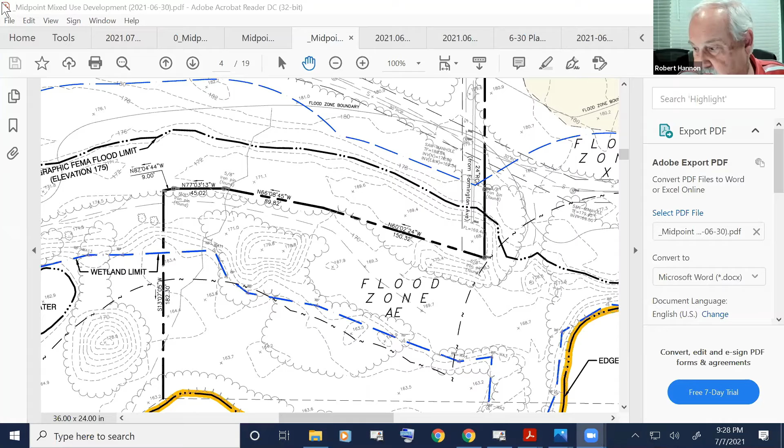Very good. Just for the record, Mark has chimed in on the chat and agreed with and confirmed the motions made for accepting the application and the determination of a significant project that warrants a public hearing. Okay, thank you. Mr. Chair, do you need anything else from this applicant this evening, or are you all set? No, I think they gave a lot of information that we'll need to digest. I think they've done a good job of going back and refining the project. So I don't have anything else that I'm looking for at this point in time.

Excuse me, Mr. Chairman, I did think of one more question. Sure. So the area between the buildings that are closest to the river and the riverbank, is that going to be grass? Is that going to be left somewhat natural, or a mix of both? I'm just wondering if it's going to be a lawn, and then we would hope that it follows our normal procedures with lawn care in these areas.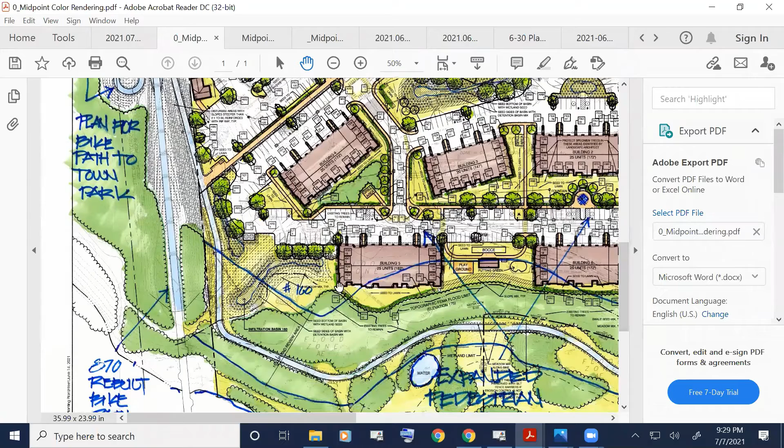Phil, do you have anything to add here? Yeah, the details for that are shown on the planting plans. There are a whole series of, and if you go back to that lower right in here, use that as an example. Number 160, that's our number 160 storm basin. So we have various types of grasses specified for that, all native grasses. Any areas disturbed above that would be native grasses.

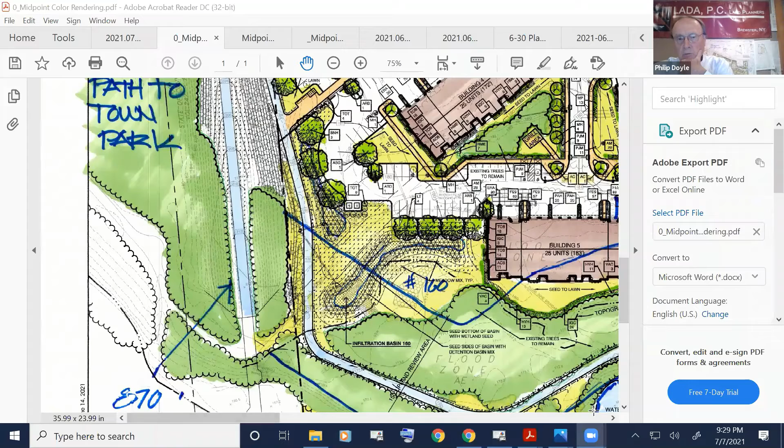For example, in this area there might be a lawn, just hold on a second, Shannon, right through there, exactly. And areas immediately adjacent to the building where Shannon just had her cursor, we would have a slope mix on that crosshatched area, a special native grass mix that we wouldn't want people on, but that would be a slope mix. And then native grasses above that.

And we would be looking to implement a relatively low and natural fertilization process around the buildings. You can see the darker color rendering along those edges. We'd be proposing habitat plantings of shrubs in those areas to keep people that might be on the lawn if they come out the door of the building and they're sitting out there.

We want to keep them out of the wetlands and out of the floodplain wooded areas. So we're sort of setting up fences with shrubbery. And all of that's shown on the plans further to the east as well. Okay. All the shrubs, the grasses, different slope mixes are detailed on the plans. No, that looks good. I see it now. The existing trees remain and then the different treatments you have.

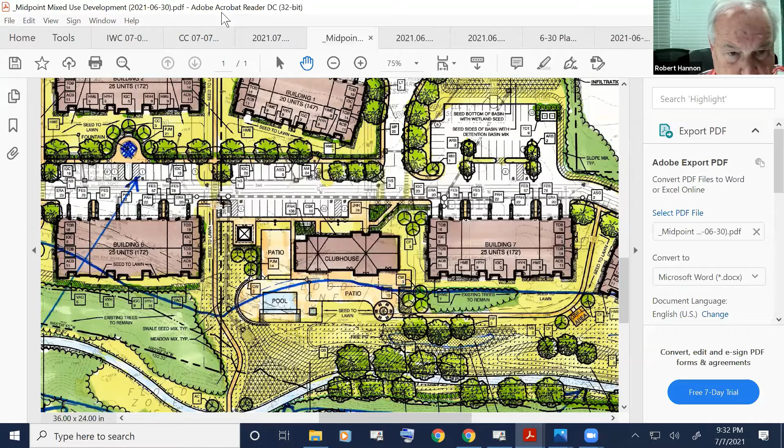Holy cow. Holy cow, yeah, we got lightning, we got cats and dogs outside. And Dave, you walked tonight, right? Dave did not. I drove, but I did walk. I figured you were close enough you'd walk it. So

I included in the agenda review and the attachments information. So the next item on the agenda is Plant 17, 1179 Farmington Avenue, and just an update on the restoration efforts. Understanding that we would probably run to this hour in the evening, I did not request the owner, his attorney, or any of their consultants to log on this evening. I know at the last meeting, I believe George Logan was on and provided an update, and Bruce Sear had worked closely with the

owner and his crews on site the week that I was away, and Bruce shared photos, and there were summary updates. So I included all of that in attachments for all of you. So there were email updates from Bruce as well as photos. And there were drone photos. So unless someone has a question on something that Bruce sent, what I'll share are the latest drone photos I have, which are from June 30th, and then photos that their attorney, Bill Galsky, shared with me today. He was out on site today.

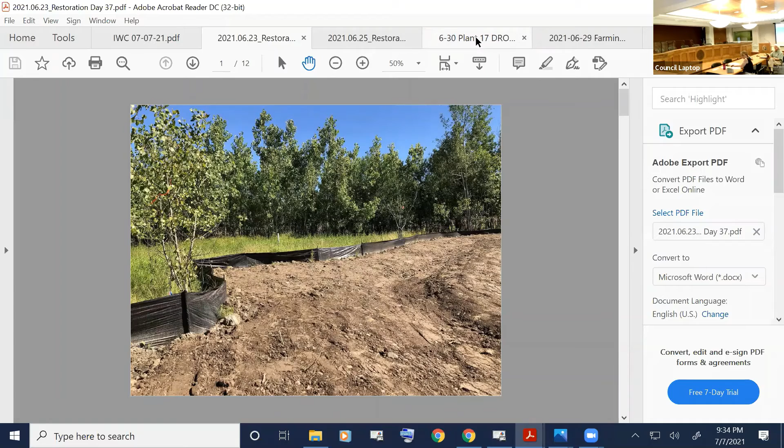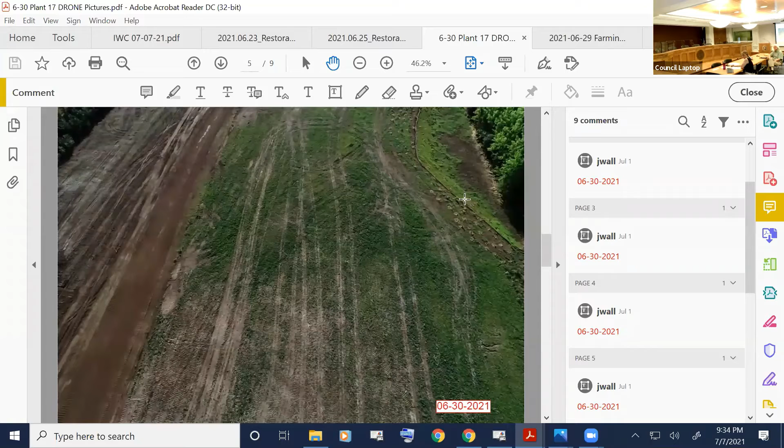With good news, it all shows that these basins are holding water as anticipated. So this is the drone footage from June 30th. And you can see the vegetation starting to take place. Here it's all starting to revegetate in the upland area. And you can see the plantings, and you can see they created little berms, basically straw berms around the planting areas in order to hold water within that sloped embankment, that 8-to-1 slope that we agreed to.

You can see on June 30th, there had been some water retention in the restoration area. And then this is the area beyond the restoration activities, and that area will be overseeded here. It may have been done already at this point, but it wasn't at the time of these photos.

And then you can see here, this is the wetland creation area. You can see very clearly, from the aerial, the stepped elevations. You can see the two deeper depression areas, and you can see some of the planting pods that were done. I believe the planting continued into early this week for finishing up.

So that's it from the drone photos, and then from the photos that Bill shared that he took today. This is the wetland creation area. There's still erosion control around it, but you can see the inundation is definitely taking hold in both of the two lobes of the wetland creation area. That's another look at the wetland creation area, and it was as designed. There was a high point between the two lobes.

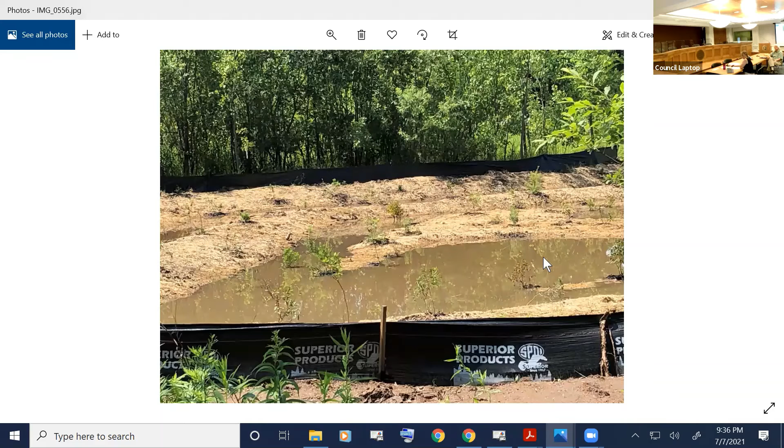I believe the exact configuration morphed a little bit. We did get an as-built of this prior to the plants going in, so that was done and was reviewed on site. And like I said, there's a give and take of that. So there's three photos of that restoration area, and it's holding water. Sorry, that's the creation area, holding water. So it seems to be in good shape.

I think they're still looking to have the monitoring wells installed. I'm not seeing those in any of the photos. And Sigrun, their biologist, will be on site next week taking a look at the plant health and just making sure things are starting to emerge and remain healthy as anticipated. So we are quickly going from construction installation to monitoring phases at this particular point in time. So if anyone has any questions, I'll do what I can to answer, or jot the questions down and get answers for you.

I don't have any. I don't know if anybody else does. No question. Sounded good. Thanks. Okay. It's starting to look good. Yeah, no, it is. It's been fun to be out there. Found some interesting critters too. A couple of ribbon snakes, couple of black snakes.

I am going to move along then to planner's report items. Since I had so many other attachments open, I did not go ahead and update these or open all these initially, so I'm going to do that real quick. So 402 Farmington Avenue is the first item on the planner's report agenda. And I got something in my chat. Okay, Mark chimed in and said progress looks great. I'm encouraged that this new wetland area will function as planned. Just wanted to make sure I wasn't missing anything.

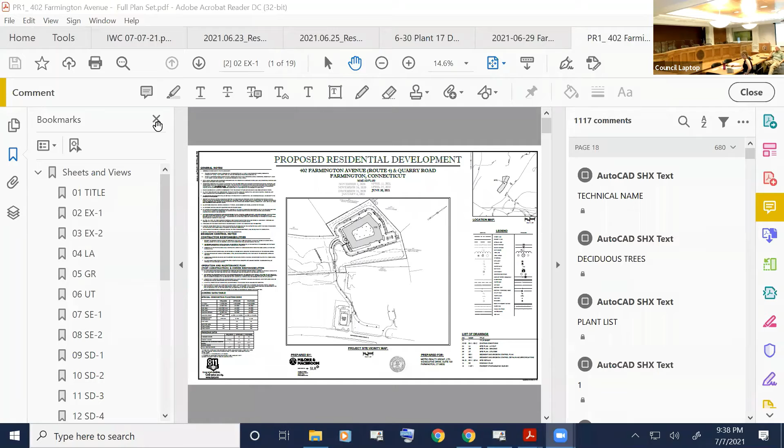So 402 Farmington Avenue, as you may know, I think I kept you up to date on some of these things. The Town Plan and Zoning Commission approved the zone change and the site plan for the proposed apartment complex, but denied the 4th story and 45-foot height. So the applicant is returning to the Town Plan and Zoning Commission. They'll be in front of Town Plan and Zoning next Monday on July 12th for a site plan modification to remove the 4th floor and then close off the loop.

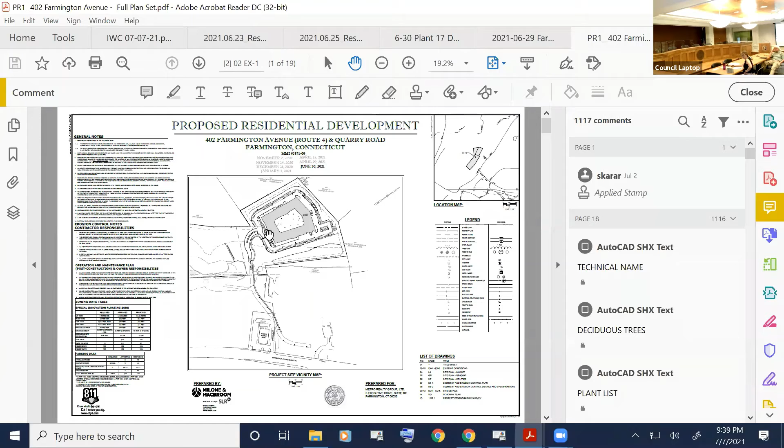You'll recall the original plan had an opening here. The building stopped here, and then it just had a small hook on that south end. The applicant is putting forth an application that will be 3 floors at its maximum height. They did convert some additional first floor garage spaces. They had already converted some of these on the south side. They converted some of the underspace garage on the first floor here to apartments. And with that conversion, as well as closing this loop, brought them back to an apartment count of 130. The plan approved at TPZ with the zone change and site plan had 131. So it's a drop of 1, down to 130.

Megan had completed a memo because I wanted to make sure there was nothing else from a wetland standpoint or regulated area up in this area, that when they close this off, if there were any changes, and that is not the case. So everything that's shown here was already part of a disturbed area. So it doesn't change the regulated activity. There's no new regulated activity within an upland area as part of this

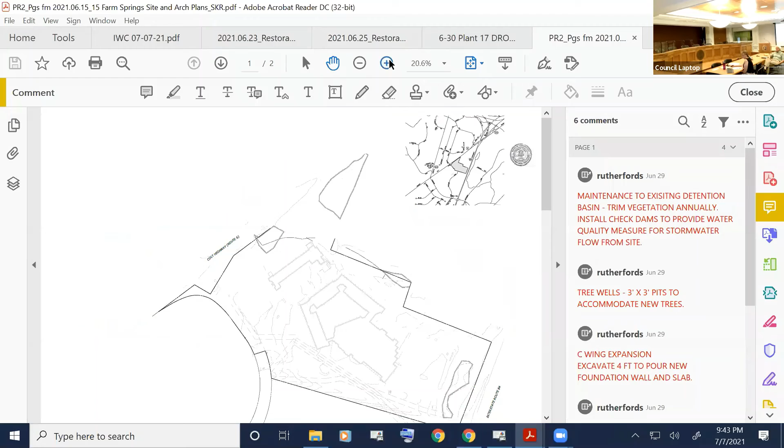So what's going on with the Marriott is the new property owner and applicant is looking to land the special innovation zone at this location and convert the Marriott from a hotel and conference center to an apartment complex with some mixed use options. There'll be a restaurant, a coffee bar, and conference and meeting space that will be available. So that public access space will primarily be within this portion of the building. And then the hotel units that had been in what they refer to as the A, B, and C wing and the E wing are going to be converted to apartments.

As reviewing this application and the details, this has been quite a fast-paced application that's come through. And as we were going through staff comments with the applicant and engineer, we drilled in a little bit more as to expansion efforts that were taking place for building E and wing C. And what we found is for building E, the expansion efforts are really taking place where there is an underground garage.

So there is an underground garage located, the garage entrance is here, and you park underground, and the building footprint's here. So they are going to mill out pavement in this area and then expand 1 story to infill in this location. So there's no earth disturbance. It's a milling of pavement down to really what's a concrete slab for the ceiling of the underground garage that's below. And then they'll come up 1 floor.

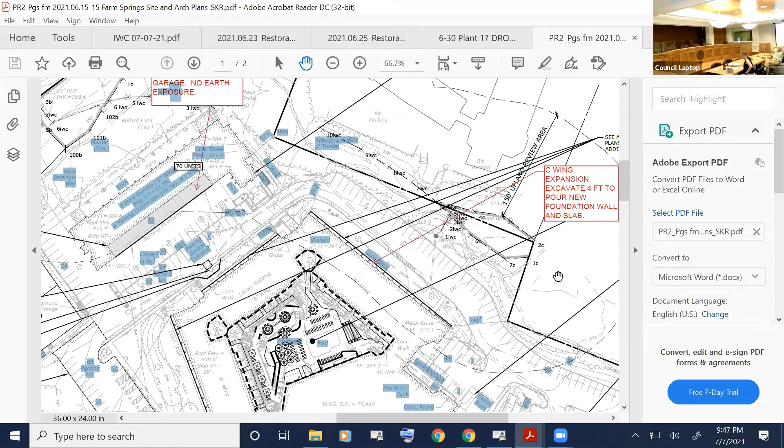The final 2 elements are a little simpler from an explanation standpoint. There's a large parking area to the south edge of the property. So they're looking to install some tree wells and get additional trees in here to kind of break up the pavement area in the back. Again, there'll be earth disturbance. So the thought was that also is regulated.

And as a staff comment, the staff was requesting that they look at getting some check dams in here to hold back water quality volume in this portion of the existing stormwater basin. The stormwater basin takes water not only from the development, there's a pipe system that's shown here on the plan. It also takes stormwater from offsite off of Farm Spring Road. And there's an inlet pipe here, and then the system outlets over here.

And staff's just asking them to do some maintenance and to do some regular cutback on the embankment. There hasn't been any since this has been developed in the 80s. And also to install some check dams to try to hold back some of the water quality volume and make some stormwater improvements.

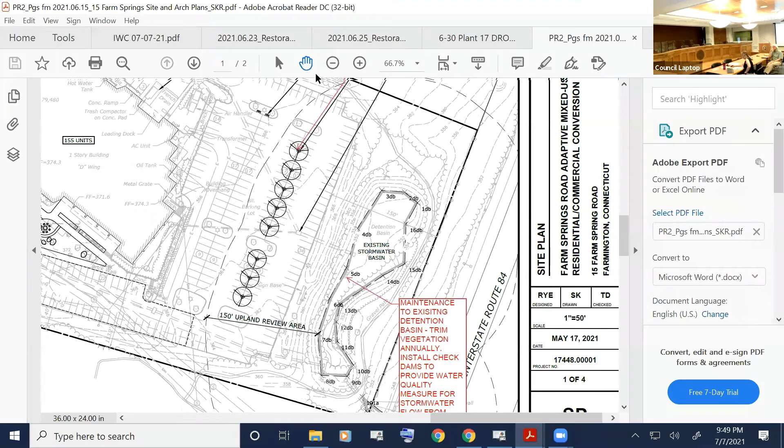So after speaking with Bob and then forwarding this information back to Robin Pearson and the applicant and explaining that, yes, at least 3 out of these 4 elements are regulated activities and require permitting with the Inland Wetland Commission, they have opted at this particular time to remove them from their scope of work so that they may proceed with TPZ on July 12th. They had opened their hearing initially with TPZ on June 26th. They were hoping for approval on that night, but there were outstanding items that staff needed to review with them. So it got held over to July 12th.

So they have agreed to remove those elements from their current scope of work so that they can get approval on the 12th with TPZ. And then they will come back for these additional items and come to wetlands to be permitted for the regulated activity. And then they'll have to return to TPZ for site plan modification to incorporate this infill on Wing C, these trees, and any work that's agreed to with respect to the detention basin.

So this is just an update so that the entire commission is aware of the conversations that took place, and to let you know that this will be forthcoming. It'll be in front of you, I anticipate, in September. They're going to turn around and make that application quickly. So if there's any questions, I'm happy to answer any questions, or Bob, if you want to.

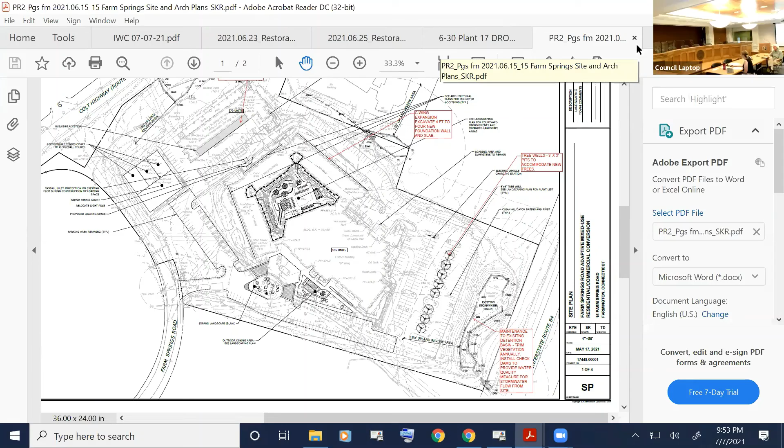So again, if there's any other questions or comments, concerns, happy to address anything. Nope. Okay. That's it. That's all I had for planners report this evening. So we're now actually at the minutes. Yes, sir. Is that part of my agenda acceptable?

Yes, sir. Okay. Can I have a motion to approve the minutes of June 16th? So moved. Is there a second? Dave will second. Any questions, comments, corrections? Hearing nothing, those in favor, please signify by saying aye. Aye. Aye. Opposed, abstaining? So we'll close wetlands at 9:54 and at 9:54 we'll start conservation.

So unless you change this on me too, the first item for other business is land acquisition. For the record, I did send it to you. I'm not saying you didn't. It's just that I hadn't printed it off because I've been involved in some other things. Oh, okay. All right. Just so we're all on the same page.

Yes, sir. It would be a land acquisition committee report, but I believe they still haven't met, huh? No, they haven't met. Okay. So there is no... We're supposed to meet tomorrow. Okay. And that's still on as far as everyone knows? As far as I know, I haven't got anything, but they seem to come kind of late in the game. Sandy's saying she didn't see an agenda come through, so maybe we'll check in with the town council liaison.